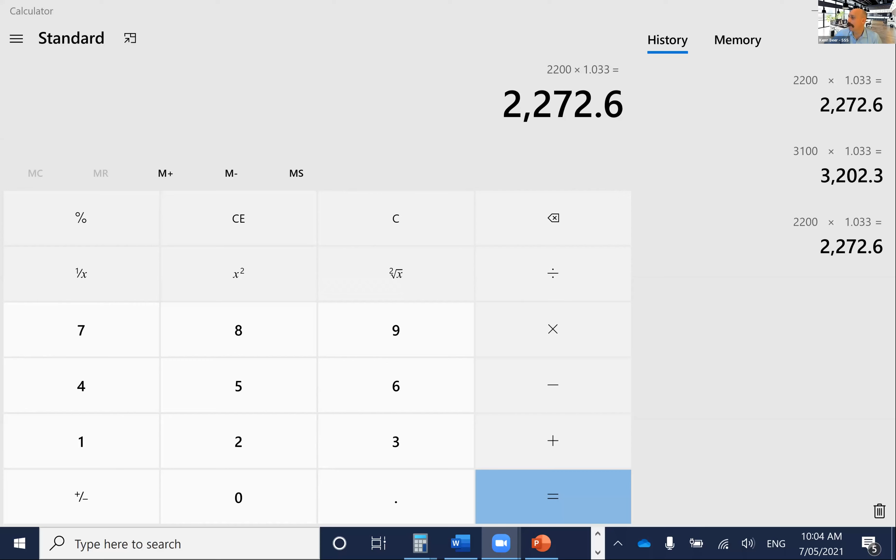The Arc de Triomphe roundabout. The French love a roundabout, and they're building like 500 a year, every year, in France. It's pretty impressive. I wonder how many we build in Australia every year. Yeah, interesting thing to find out.

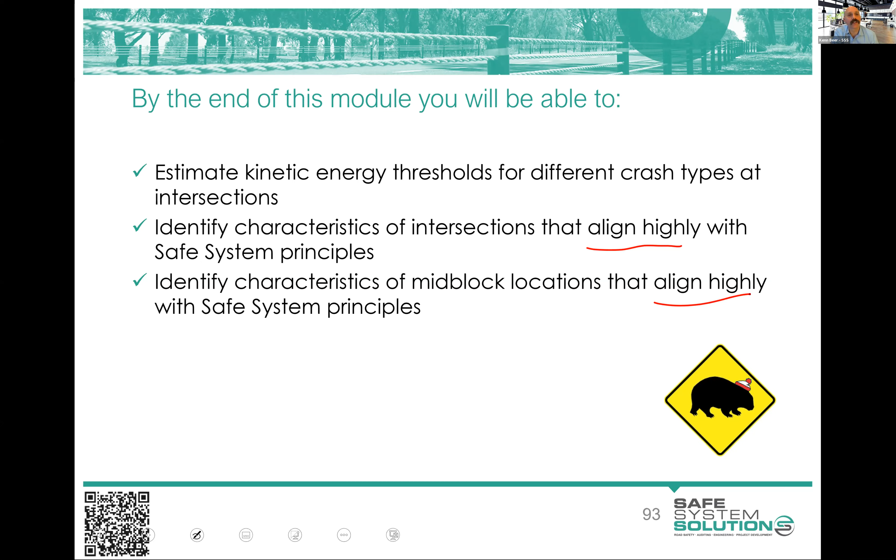Now, a little terminology here. You notice I talk about aligning highly with safe system principles. I think this is quite important. In the early days of safe system adoption, and it sort of continues today, people would often say, is your project safe system? Or, we can't do that, it's not safe system. That was kind of meaningless to a degree, because a safe system is a spectrum. We have things that align highly with safe system principles, or things that don't align so highly. So it's important that we all start to use that terminology rather than thinking safe system is binary.

Don't forget to count your wombats.

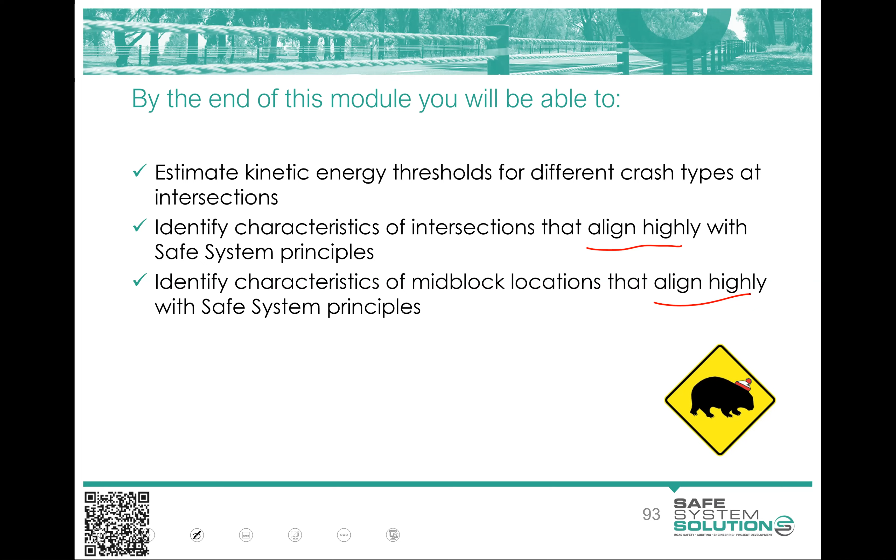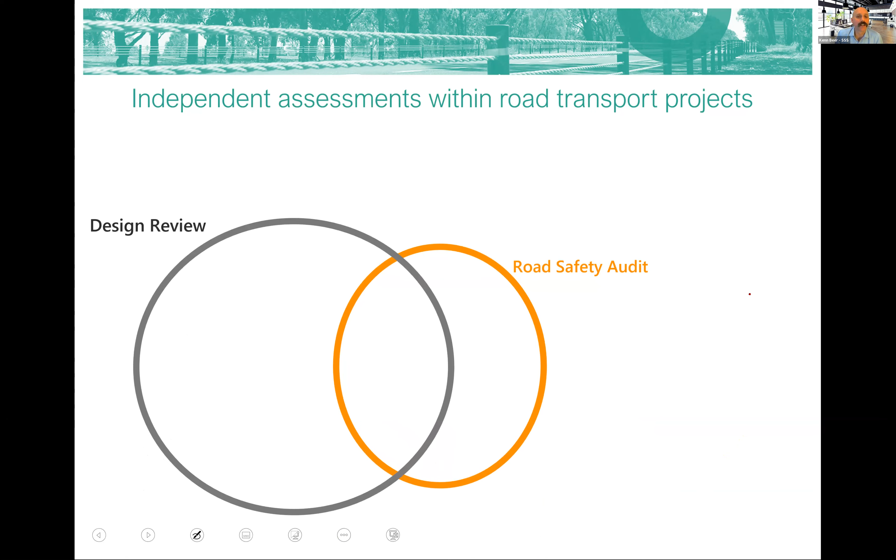We talked a bit last time about the context of road safety audits, design reviews, safe system assessments being this other entity, but with some overlap with safety in design and Disability Discrimination Act checks or audits or the like. So there are lots of processes to inject safety into your transport projects, and safe system assessments is one of them.

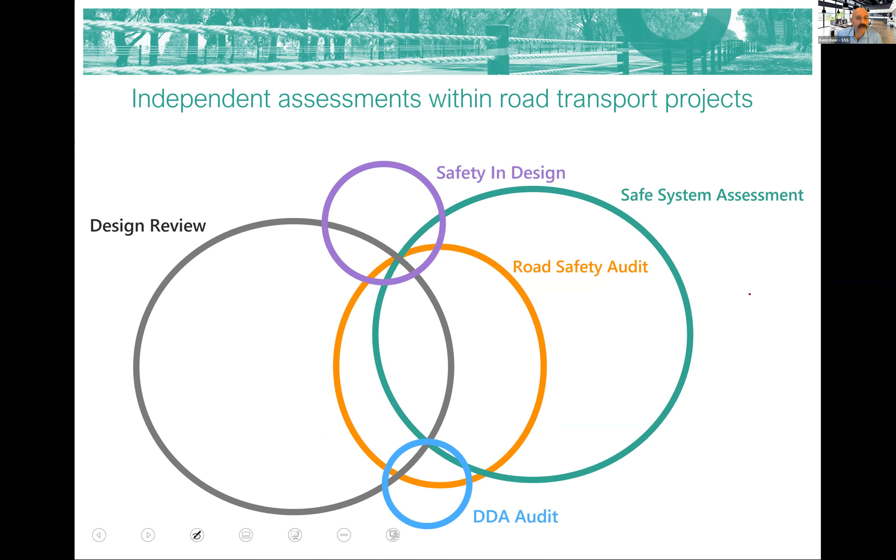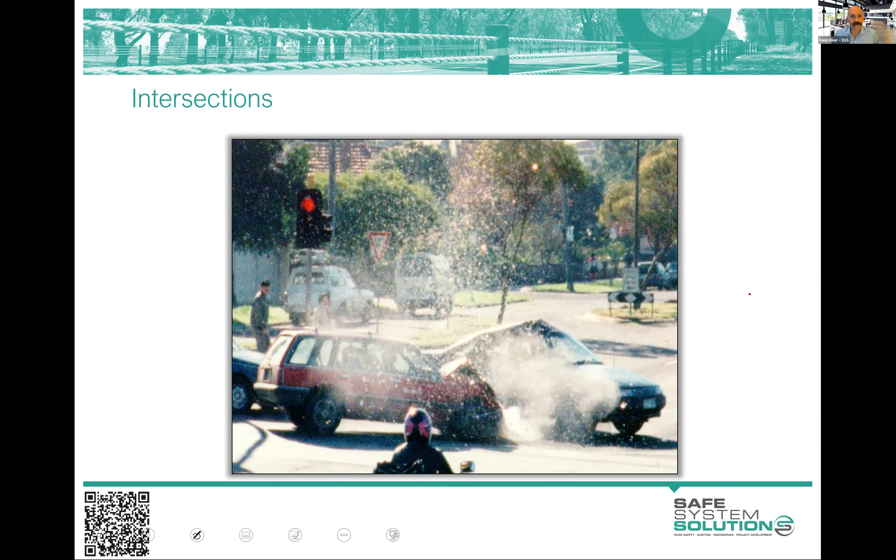Obviously, you need to think about all of this within the context of whatever your road user hierarchy is, your movement and place strategy, your strategic objectives of your network. We'll talk a fair bit about that next module. But for now, let's just keep it fairly simple.

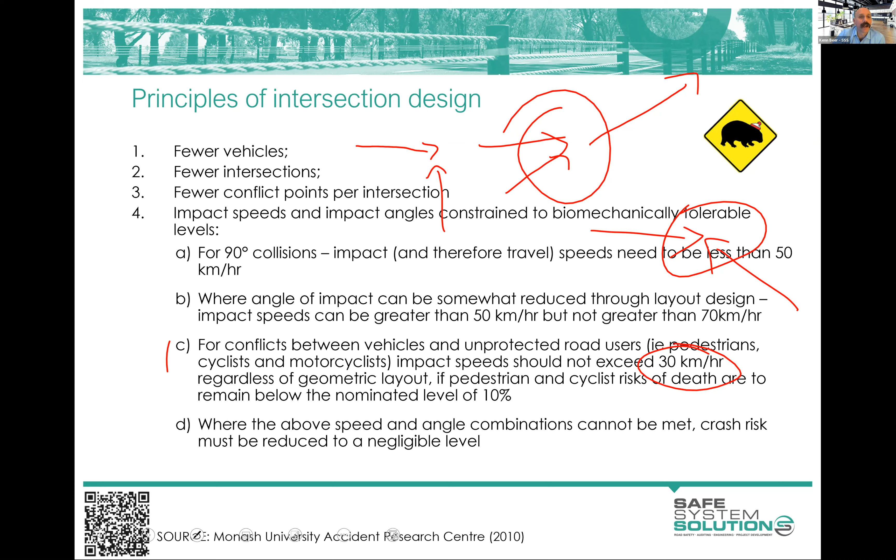And then for pedestrians, cyclists, motorcyclists, we're really aiming down around that 30 km/h or so. When we're not able to meet these speeds, we need to look for other ways to eliminate crash risk or eliminate the possibility of that crash, be that separating road user streams or other measures, which we can talk about later.

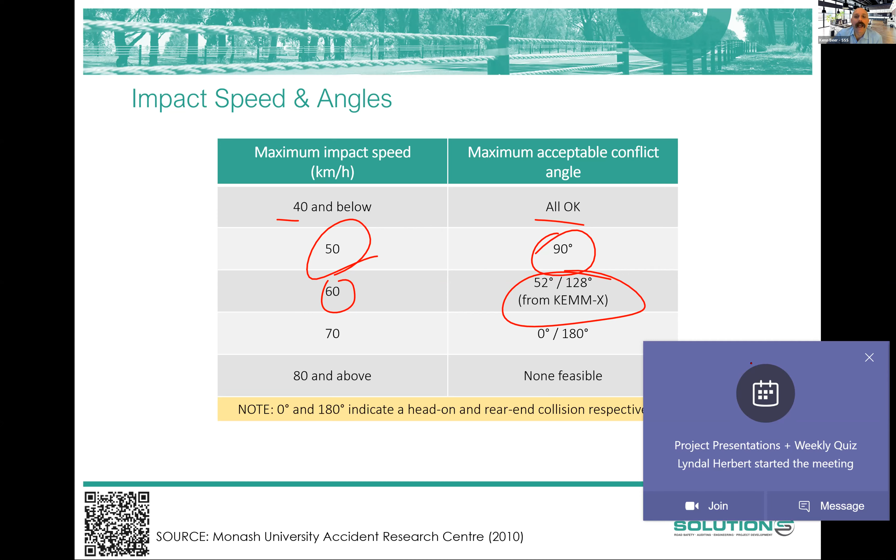At 70 it's head-on or rear end. And we're not really able to operate an intersection above 80 km/h if we're going from a standing start of vehicles. You can operate intersections well above 80 km/h - 100, 120, 140, 160, you name it - but you've got to really accelerate vehicles up to that speed as they enter. So your classic example is an on-ramp, isn't it?

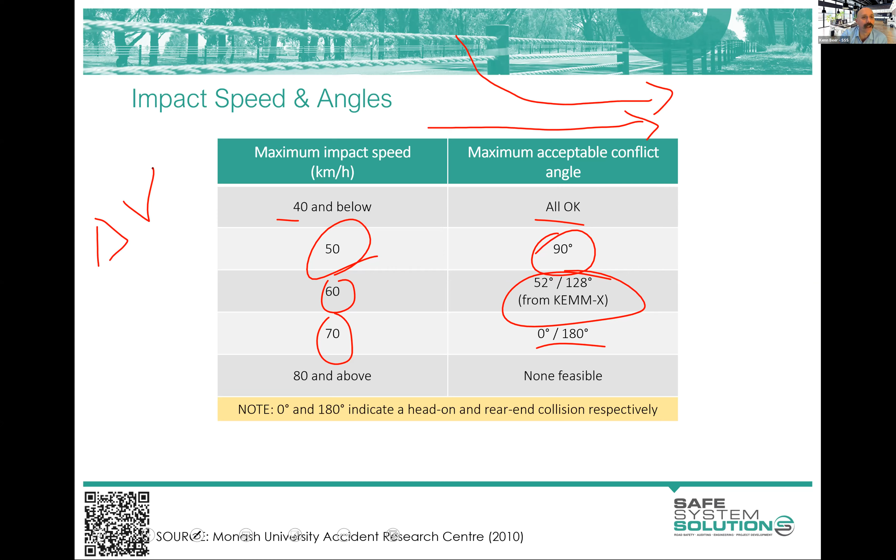You can operate them pretty safely because it's the delta V, the change in velocity, that we're interested in when the crash happens. So two cars crashing - one going at 180 km/h, the other hitting it at 200 km/h, going in pretty much the same direction - is generally okay in terms of energy transfer.

Yes, you've got to think about it that way.

Kathy, can you still hear me? Yeah, you're all good. Kathy, can you hear me? Yeah, you're dropping in and out there a little bit. Yeah, I just dropped out. Can you still hear me? Yeah, I can still hear you. You have frozen on the screen though. Yeah, just turn your camera off. Just a question that's popped through. Can you - oh no! Hey, there you go. You're a bobblehead.

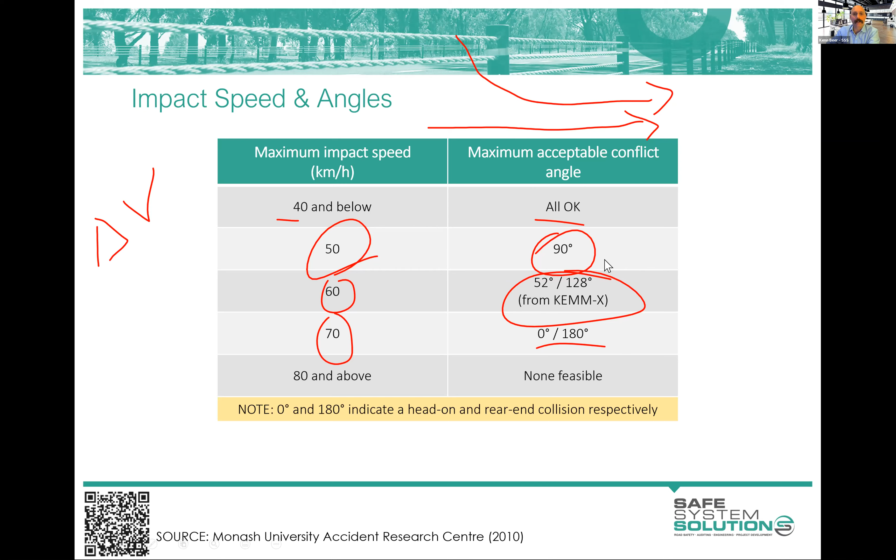Rear end speed, where heavy vehicles are the bullet vehicle - so rear end crashes where they're heavy - well, yeah, we have some pretty low speeds that are beyond tolerable levels when heavy vehicles come into play. There's actually a little bit of a lack of research in heavy vehicle energy transfer. Just doing the physics on it, you're in a bad way.

But most of the other numbers I'm giving you are based on crash - like mega studies of crashes. I've been able to get this from a whole lot of crash data, and nobody's really done that to a large degree for heavy vehicles. There's a guy in Adelaide sort of working on some of that, but we really know that heavy vehicles are going to cause a lot of damage in those rear end crashes.

It's still going to be better than a side impact crash. Certainly there's a lot of crumple area - there's the seat, there's the headrest, and all that are protecting the occupant of the vehicle. But nonetheless, it's a lower speed than the 70 we're talking about for car to car. Exactly what we peg it at, not quite sure.

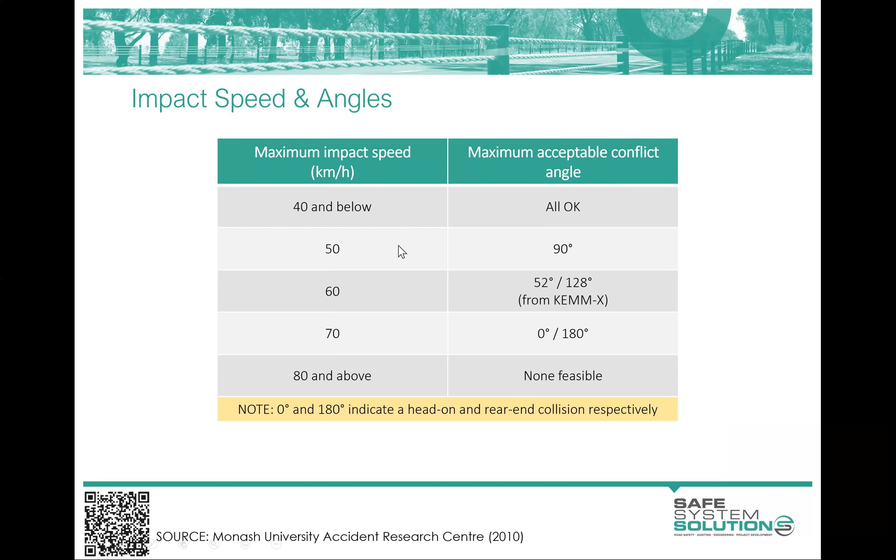Thank you, Kenn. Just another question that's come in: is this why we have a maximum speed for traffic signals at 70? Is that related to rear end crashes for the queue?

No, I'm not sure - that might be a specific Queensland requirement. I like it if it is. Actually, if you were pegging your maximum speed for traffic signals to safe system energies, you'd have it at 50, because there's potential side impact, right angle crashes at signalised intersections. But it's probably an indication that we know the performance - red light running and those sorts of things - and the energies are very bad for 100 and the like. So most jurisdictions tend to have some sort of limit on it, and maybe Queensland has 70, which is good.

You can sort of start to put angles on potential crashes. Here's a conflict point diagram with some angles on it. You don't need to be that precise in a safe system assessment - you can just go, that's pretty much a right angle crash, that one's pretty much a glancing blow. So you can peg them back to your angles and get some idea of whether it's above or below what we generally think is tolerable. I'd say that's pretty much a right angle crash there, although it's 104, it's pretty close to that. That one's pretty much a glancing crash, and you could be talking 60 kilometers an hour as the threshold speed on that one.

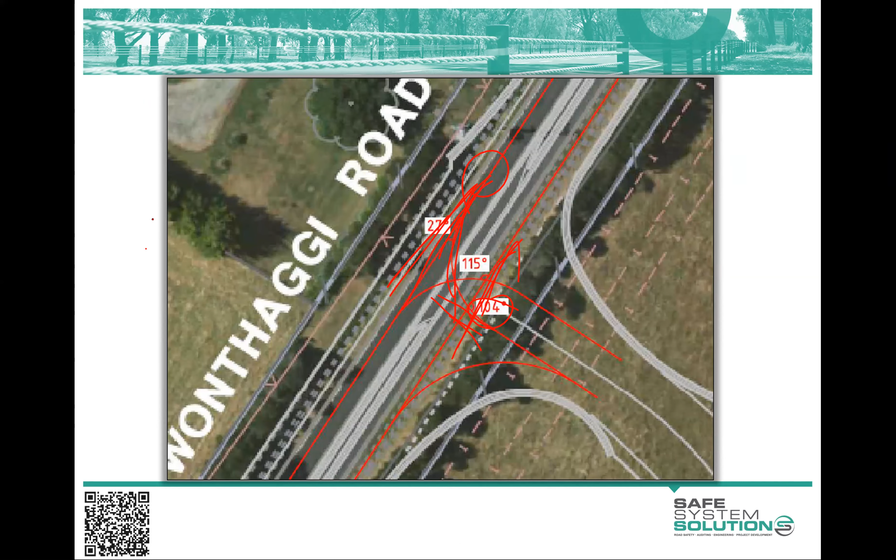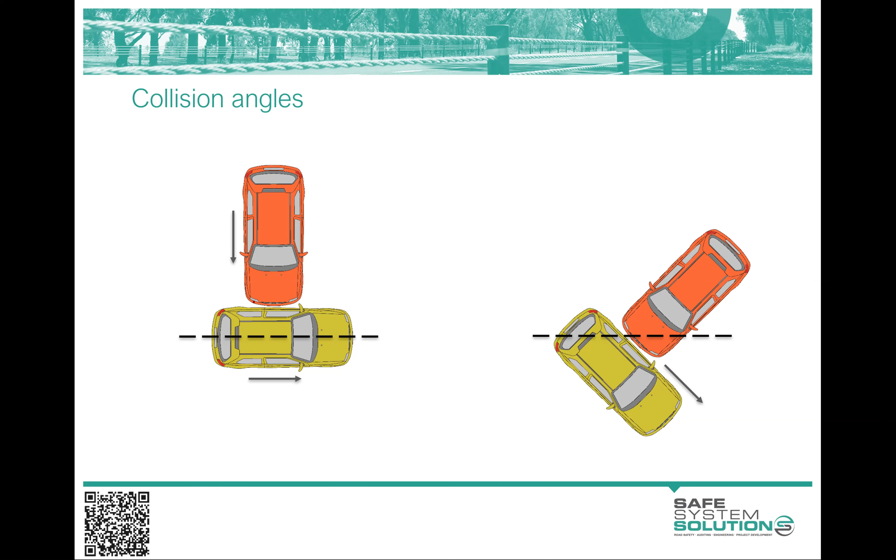The other thing I mentioned - you could have two cars crashing, one at 180, one at 200. That's right, but what you do need to think about is secondary crashes. They're really important. We know vehicles have their initial crash, and then they often have a secondary crash - vehicle to vehicle, and then single vehicles hitting fixed hazards. This especially occurs around intersections, because you've got the two vehicle interaction. And we tend to have a lot of fixed hazards around intersections - power poles, signal poles, signal pedestals, other roadside furniture and things. So we see a spike in runoff road crash risk around intersections in the lead up and through the intersection, because people are either crashing, clipping vehicles, avoiding vehicles, and leaving the road. So we do need to think about that.

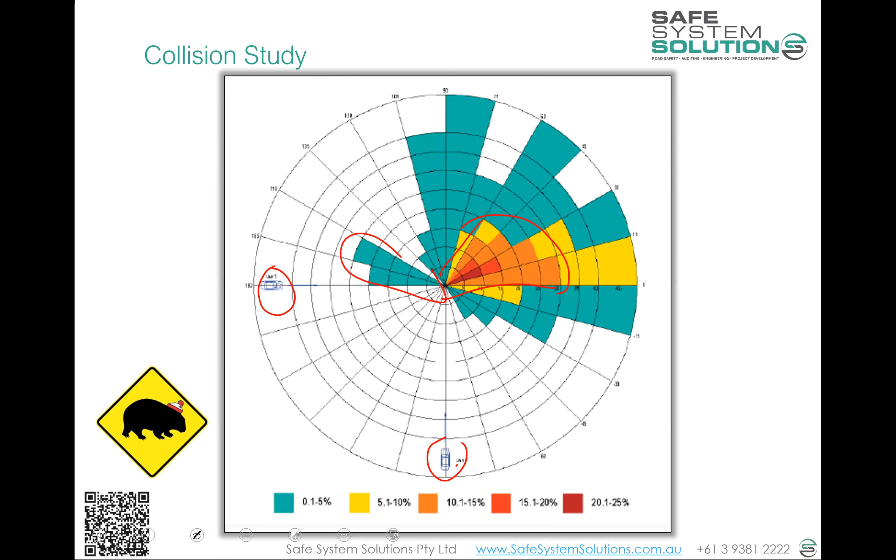Okay, let's get going with a little exercise. I want you to do something this morning.

I want to give you this intersection, right? And your aim for the little exercise is to redesign this intersection, and change anything else you want, to eliminate death and serious injury - eliminate it going forward.

I'm going to give you a few constraints, okay? I know you wanted complete freedom to do that, but I'm going to give you a few constraints. I'll explain the intersection and a few bits and pieces about it shortly, but the constraints you have are: one, you can't close this intersection. Because I know some of you are going, well, Ken just said the Monash University have put some principles down, and number one was fewer vehicles, and number two was fewer intersections - so can we just close the thing? Well, we've done the community consultation and analysed the network, and we can't close the intersection as part of our project parameters. In fact, access still has to be in and out in both directions. So that's constraint number one. Constraint number two is you've got a budget limitation of $3 million.

Anybody getting subtitles now? I accidentally hit something that's giving me subtitles.

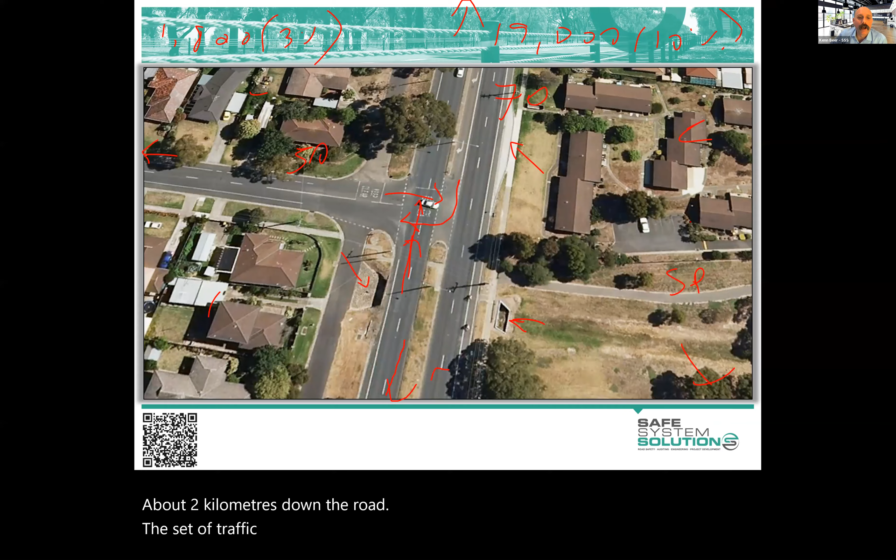There's a bit of info about your intersection. So you can't close the intersection. You've got $3 million to spend on whatever you want, and you've got to convince the community and your organisation that that's what they want to do, and we want no death or serious injury into the future, or as little as we possibly can get.

Questions? Instant cost estimator. How much for signals, please? Yeah, signals are going to cost you $1.5 million. It's fairly well set up for signals. There's a bit of civil works to do, obviously your conduits and the like, but 1.5 million for just bonking some signals in there.

Okay, and could you tell us where the school is again? Is that on the right-hand side? School is down the side road, about 500 metres down there.

What was the CV percentage on the main road? 10%. It's a B-double route.

Are we able to restrict some movements? Anybody living in this area has to be able to come up here and generally quite easily go either that way or that way. And likewise, people coming from down here generally in the area have to be able to get in, as do they have to be able to get in there.

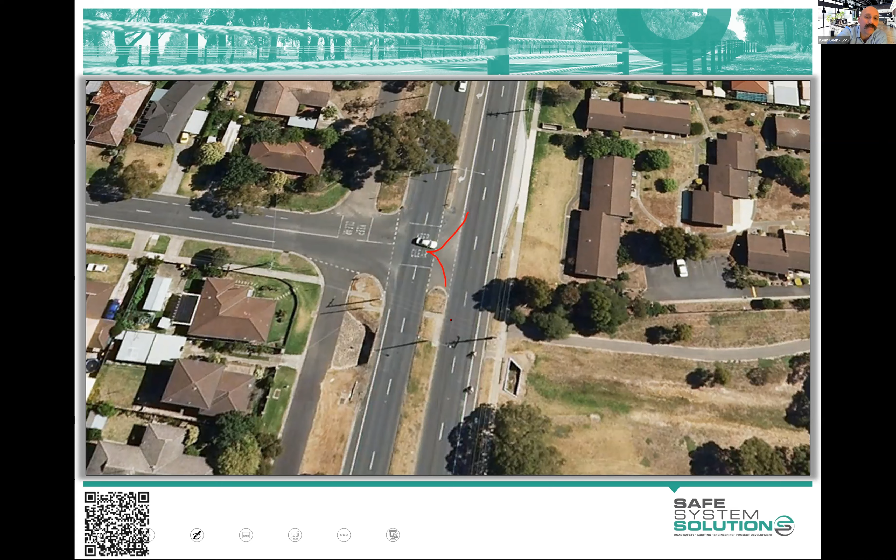We've had a seagull intersection proposed, which is really where you create - for those who don't know what a seagull is - you create a shape a bit like that. So they turn in, and then those coming out get an acceleration, and then merge in from the right.

Now, seagulls are an interesting one to analyse under a safe system assessment methodology, and the reason for that is you get a little bit of advantage in terms of crash angle down here, but you don't get any advantage in crash angle here.

The other thing is that the likelihood of crashes down here actually increases, because a merge from the right is a very problematic maneuver for a number of reasons. Certainly large vehicles with a cabin or whatever it is, there's no ability to look over your shoulder that side - you look straight into your cabin. Older people, or those who find it really hard to turn their head, struggle to merge. The right lane's often the faster lane. There's quite a bit of trouble.

There's a really interesting tool available - it's the seagull intersection risk tool - and you basically plug in your variables and it tells you your risk of a seagull at that intersection. Most of the time it doesn't perform too well. Interestingly, the person who proposed it here has opted to signalise it, which certainly helps. So that's a very interesting one.

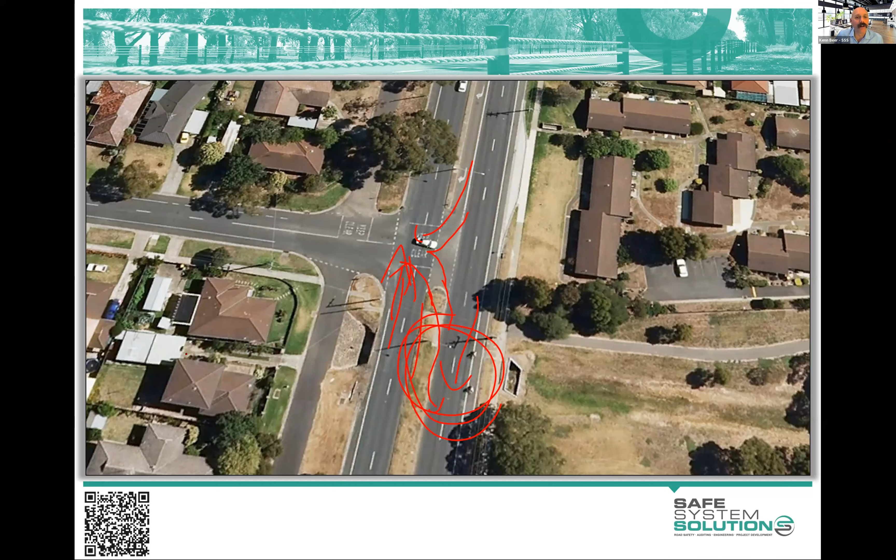Now, quite a number of you wanted to go with the signals, and as I say, very understandable considering the unbalanced flow, your cost constraints, the fact that the intersection is so well set up to be signalised, and the signals up the road and down the road, so you have consistency along the route. There's a lot that drew people to signals. You're all experienced people, and you could see that very clearly.

And rightly pointing out this will reduce the likelihood of crashes. But our aim was to eliminate crashes, wasn't it? The aim is - are our signals going to eliminate crashes?

What I did was put into one of our tools here, which is a heat mapping of fatal and serious injury crashes. I did it for outer metropolitan Melbourne, but it works for outer metro Brisbane, Cairns, you name it - anywhere there's a decent population. You heat map it, and it comes back something like this. The hotspots of death and serious injury - sure, you've already guessed it - these are signalised intersections.

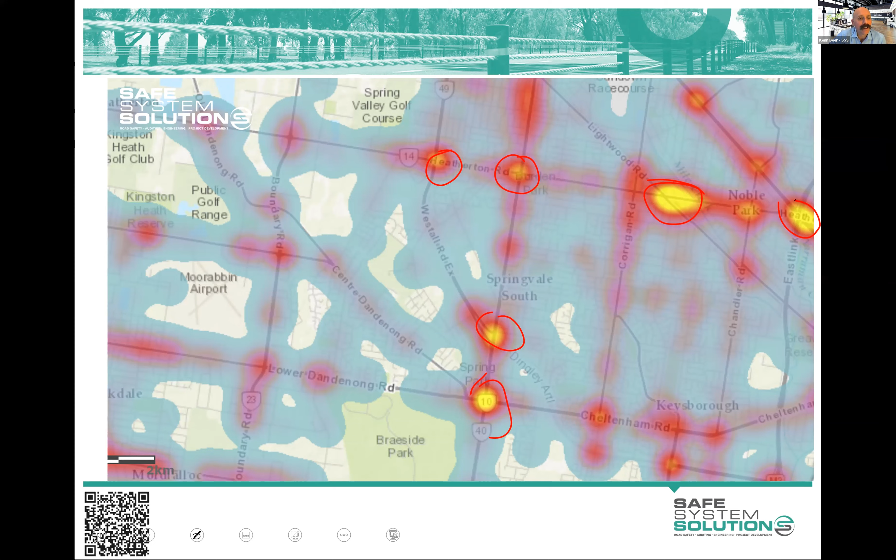Professor Jeremy Woolley, out of the Centre for Automotive Safety Research, when he was doing the inquiry into the National Road Safety Strategy, came out with a statement. He said traffic signals are the biggest failure of traffic engineers. That's a very provocative statement.

But the reason he said it was because there's a bit of a perception out there that when you signalise an intersection, it's your ultimate treatment until eventually, way down the track, you grade separate, you do a flyover - that somehow that's the end of the run there. But the fact is that it's a highly dangerous, high risk area.

Now, we are being fairly driven here by volumes as well. It's signalled often because of safety risk or these sort of things, but it's very driven by volume. So these are very high volume roads crossing - I'm not arguing with that, so there's lots of exposure. But what's going on that they consistently bring up this death and serious injury?

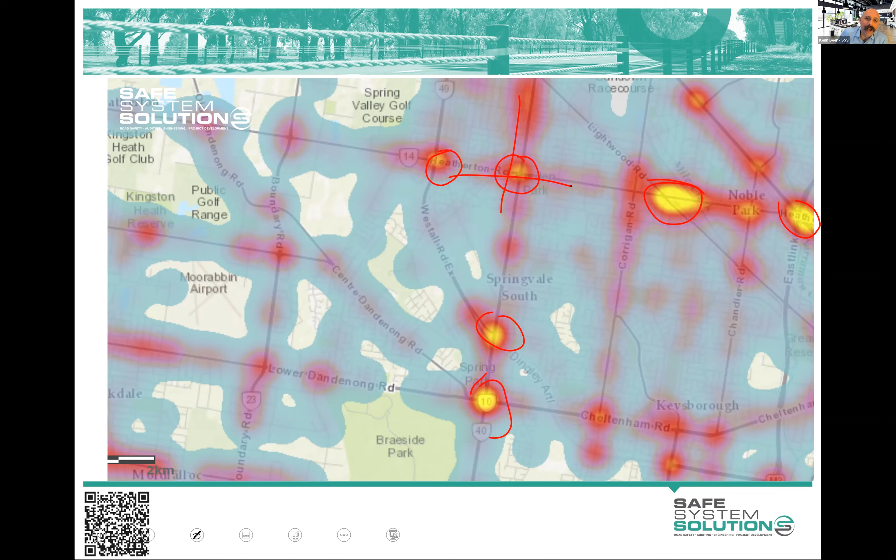But why - if these were all roundabouts - why wouldn't we see that? Well, people were trying to get a roundabout in there, and that's probably because you knew that they're going to perform better in safety, but you couldn't afford it, and we may have some traffic flow challenges.

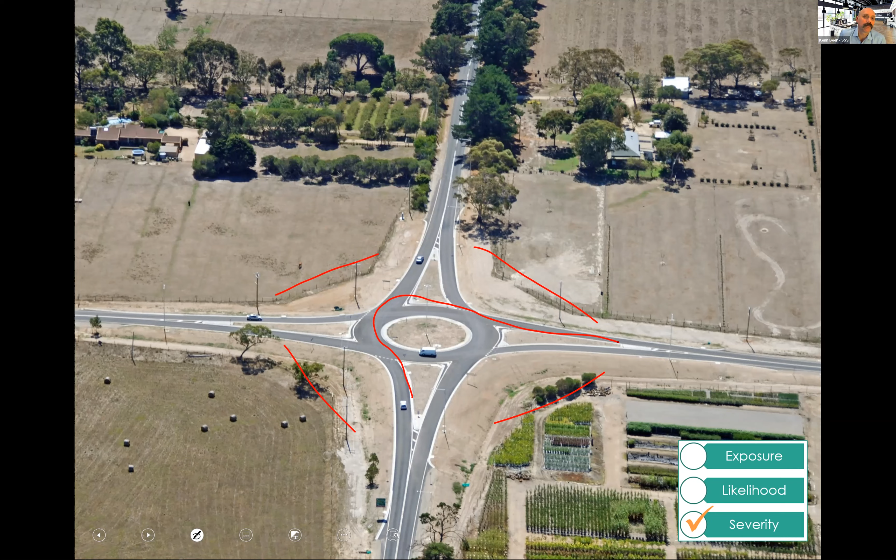We have little roundabouts like this one. Now, I'm sure you're all going, well, yeah, very different road environment, and you're spot on. But this is a mountable roundabout where, if you did have a large vehicle, they're just going to track straight over it. So you don't need to get them all the way around it.

But why would this perform better as a safety feature in a lot of scenarios? Well, the reason is that nobody approaching this intersection believes they have ultimate priority. So every driver approaching this believes there's a chance they will have to give way to somebody else. So they slow down and they look around, and there's a whole lot of good things about it.

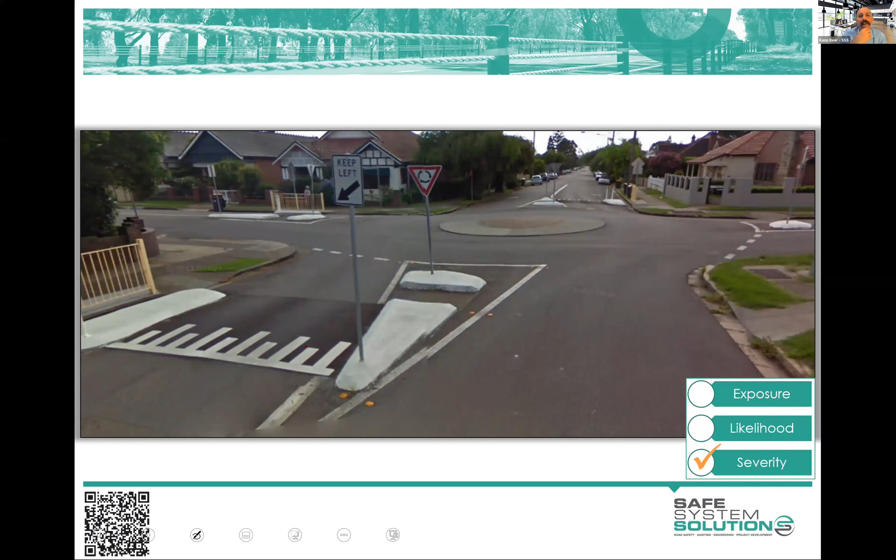Now, there's some challenges on this. You've got a pretty straight run through there. Vehicles can go at high speeds and those sorts of things. So it's not as good, but it's still pretty good. You can do things like slowing vehicles on the approach using raised platforms, but we're talking collector road environments here, really, aren't we? That we're looking at examples from.

But you're starting to see here that these ones are addressing the severity of crashes, whereas our signals were really only touching on that likelihood. And in order for us to genuinely take a real leap towards that elimination of death and serious injury in intersections, we need to hit on both the likelihood and the severity of crashes.

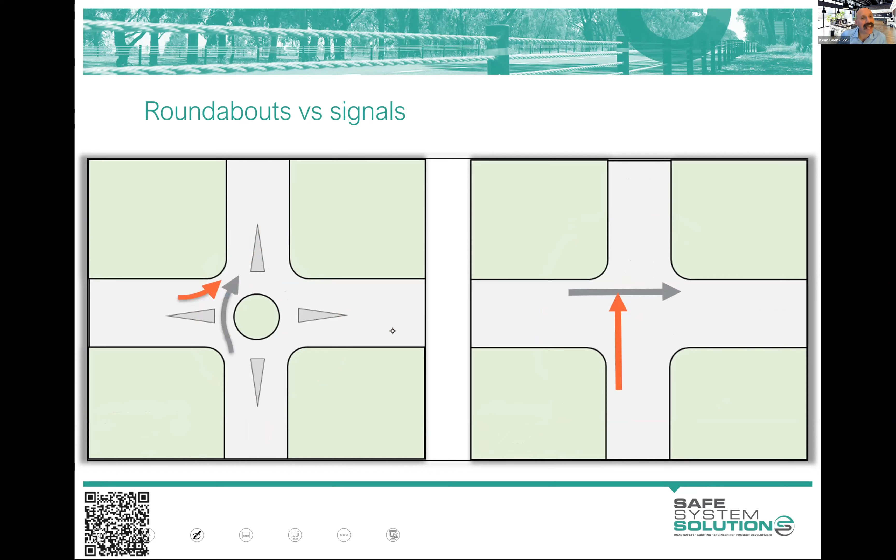The angles that you crash at are far better at a roundabout, okay? You're going to bounce off a bit, whereas that's a very harsh crash at a signalised intersection.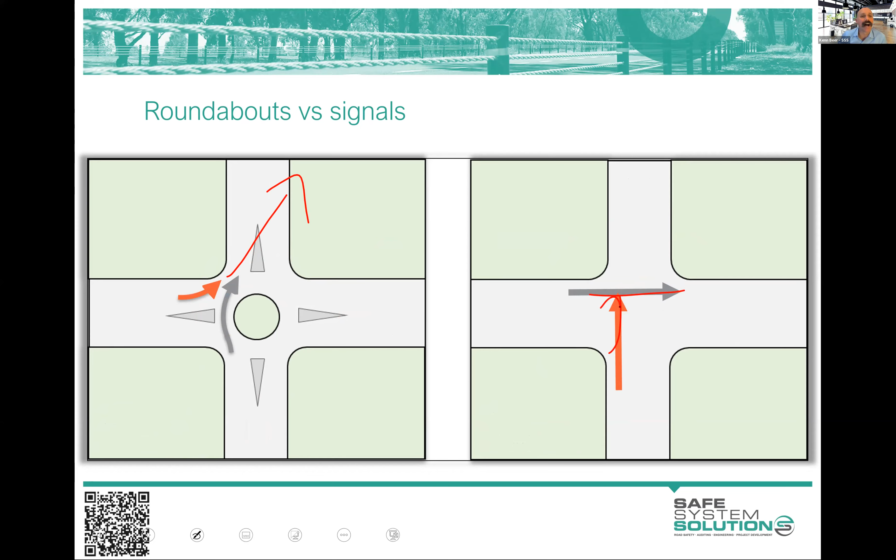And this one's just to show that when people are driving along, they drive in all sorts of states of consciousness. We would love them all to be alert, tuned in, very ready all the time. They're not, right? People drive half asleep. They drive thinking about the fight they've had with their partner. They drive after having a few drinks. They're working a double shift and having been at a wedding the night before. There's all sorts of stuff happening out there. We will continue to try to work on minimizing that, but it happens all the time.

And if you've got a set of traffic signals, some of these drivers do not wake up or come back to reality from wherever they are in their head, and they drive straight through the red light at whatever speed they're going. And I dare say some of you have probably done it. You probably go, oh my God, did I just run through a red light? Or you've driven, and you go, oh my God, I do not remember anything of the last 5 minutes of driving.

This is part of being human. If you put a big lump of infrastructure in the middle of the road, a roundabout, they wake up. They come back to reality. They look around. They slow down. They focus back in on the road environment. And so we've just got wonderful wins out of road safety by physically altering the infrastructure around that conflict point, that high risk spot.

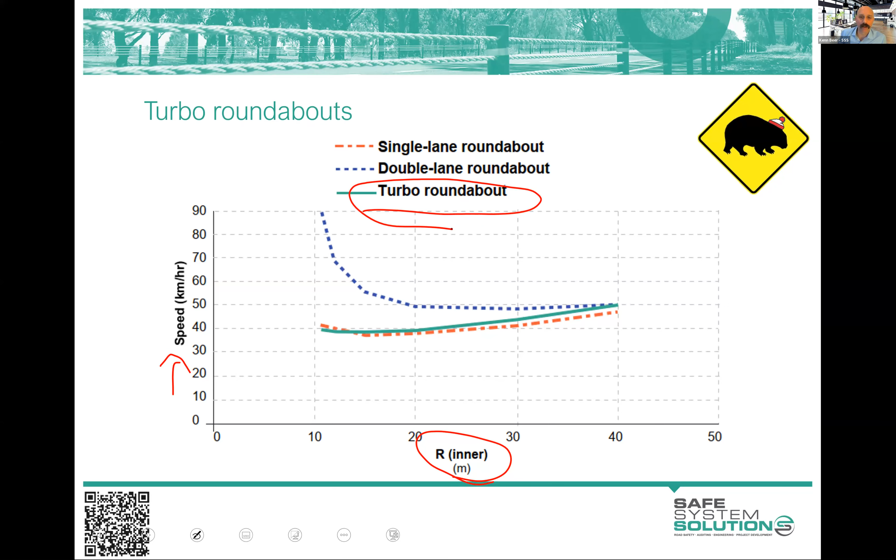Here's another turbo, for example. And I just love this, right? Look at the angle that this crash - probably not going to crash, but look at the angles that they're conflicting at. So it looks like the driver of the truck has gone out when they shouldn't. Human error, normal mistake. Car's coming around. The car's slowed down because of the roundabout. The geometry is just - they had to slow down. They're coming around and the angles are just much better. And so if that crash was to happen, we're very confident that everybody's walking away from that.

They'll exchange details, the panel beaters will get a little bit of work. But had this been a set of traffic signals and a mistake had been made and somebody had entered the red or a give way and entered, and then we had a right angle and we had speed of that white vehicle very high, we're talking death and serious injury.

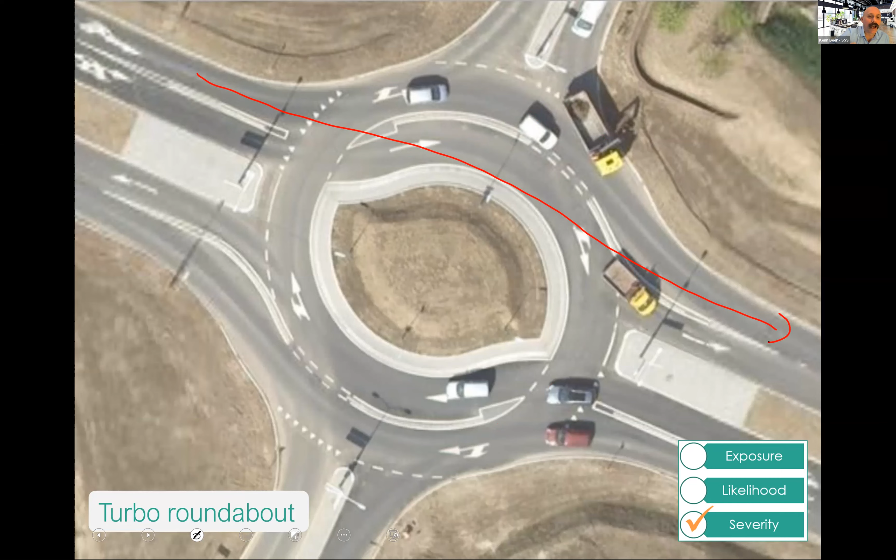They work really well. I mean, but there's only a couple of turbos in Australia. Most of them are over in Europe and the like. Admittedly, some of you road designers out there are probably going, good luck getting an A triple through that. And yeah, there's some practical challenges we've got there we've got to work through.

You can build some pretty big turbos though. So this is a big turbo roundabout in the Netherlands, and the reason I show it is this conversation that will stick with me for life that I had with a Dutch traffic engineer. I have not seen this one live, but we had this Dutch engineer come over to talk about cyclists and roundabouts, and we were doing some work with them on that and trying to work it out. And I popped this up and said, this is just amazing.

And he looked at it and he went, "This is the wrong way around," because I flipped the photo so we can actually understand it driving on the left. So they drive on the right, but I just flipped the photo. Anyway, but he goes, well known - I can't remember exactly where it is. And I said, yeah, so tell me a bit about it.

It's a signalized turbo roundabout. So it's got traffic signals here and here and here and here, and completely separated the bikes, as the Dutch of course would do. So, but I'm like, we talked a bit about volumes and we talked about speeds. And I said, in Australia...

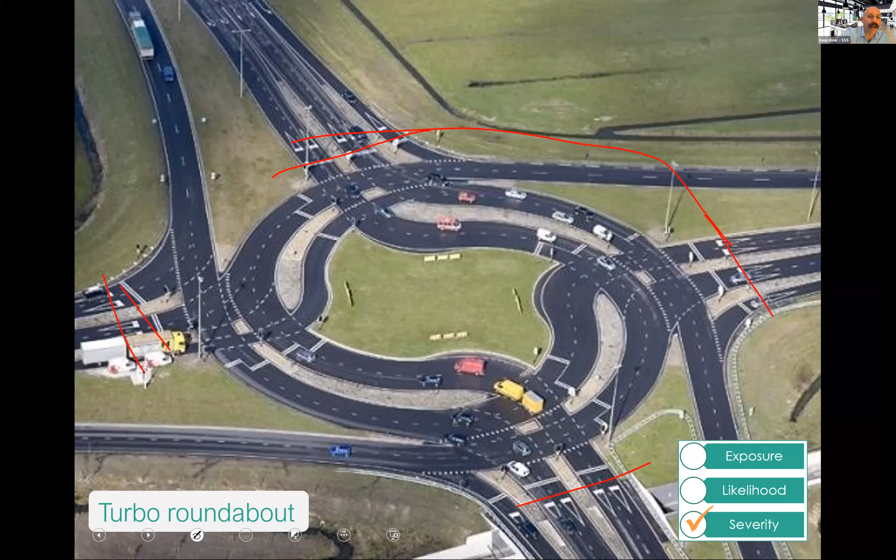But there are certain routes we've designated as traffic priority routes, where we're trying to move as much traffic through as fast as we possibly can. So how do you alter an intersection to get more traffic through while retaining some of these benefits of a roundabout?

People are coming up with these cut-through roundabout concepts and the like, which essentially give you almost as good performance, where you've still got the ability to do the right turn and store vehicles.

But any vehicle coming along has to slow down, improve their angle, and carry on through. So you still get some of those benefits.

And this one particularly, this is actually a concept. This has not been built.

I really like it for a reason - back when I was in the Vic Roads Road Safety Department, I was charged with reviewing all of the different projects under the congestion easing program.

That program was basically set up to rip roundabouts out and replace them with traffic signals, because they were saturated. They were clogging up the network, right? And they handed them over to me. Actually, I'm just going to see if I can find a memo that I used to use there.

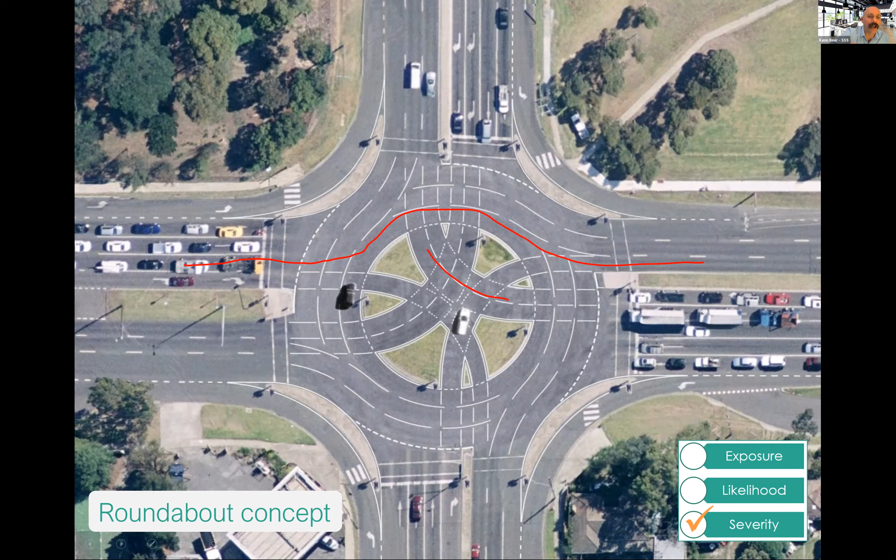Kathy, while I have a look for this, can you just tell me if there's any questions? It sure is.

Let's start with, do we have turbo roundabouts in Australia? Yeah, as I said, there's a couple of them. There's one in Horsham in Victoria. There's one in... I can't remember where the other one is. But yeah, few and far between.

Someone's saying, I came across a small-scale version of this Netherlands design in Melbourne near the airport, Broadmeadows Road and Melrose Drive. Curious to know how it performs. Do you know?

Broadmeadows Road - I think that was a signalised roundabout. I don't think it's quite a turbo. It might have a slip lane around it.

But yeah, signalising roundabouts is actually a really great thing to do. You can do it in a couple of ways. You don't need to fully signalise the whole thing - you can meter it by just signalising one leg.

You work out which leg's causing problems, and you put a set of traffic signals there. A little trick is to also make it a pedestrian crossing - that works quite well as well.

And then you have loops down the road that banks up, and when the vehicles store over the loop, it triggers the pedestrian signals, holds that leg, clears it out.

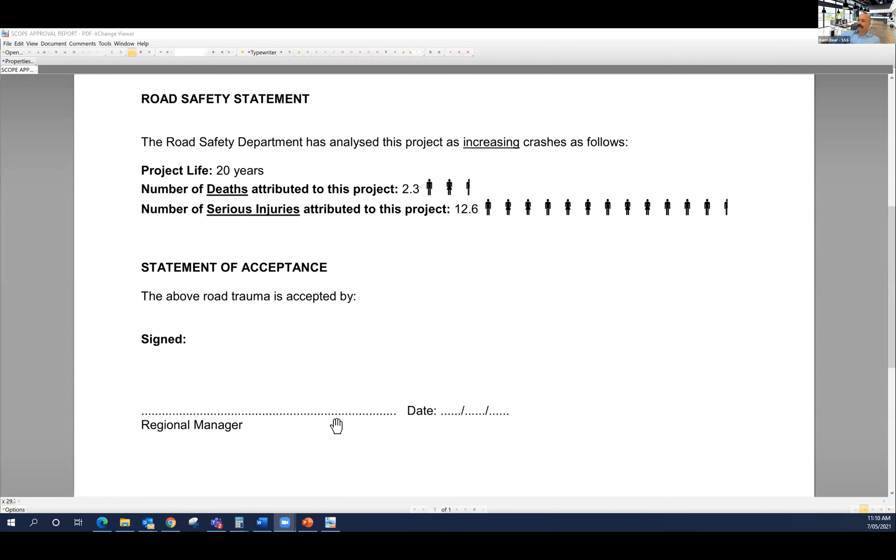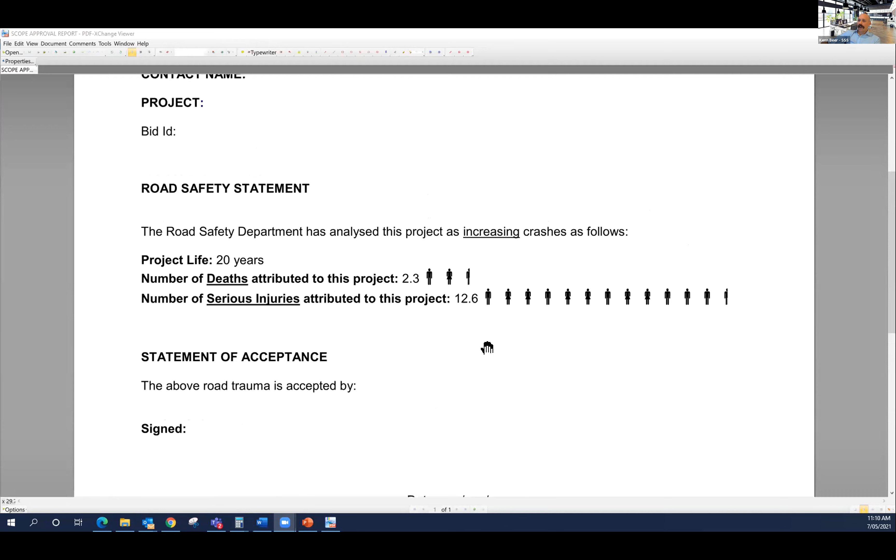Statement of acceptance: the above road trauma is accepted by, and then I'd put the regional manager or regional director or whoever it was. So I'd pop that on top of their project and send it back to them. I put little people there just to remind them that they were signing off on killing and seriously injuring that many people.

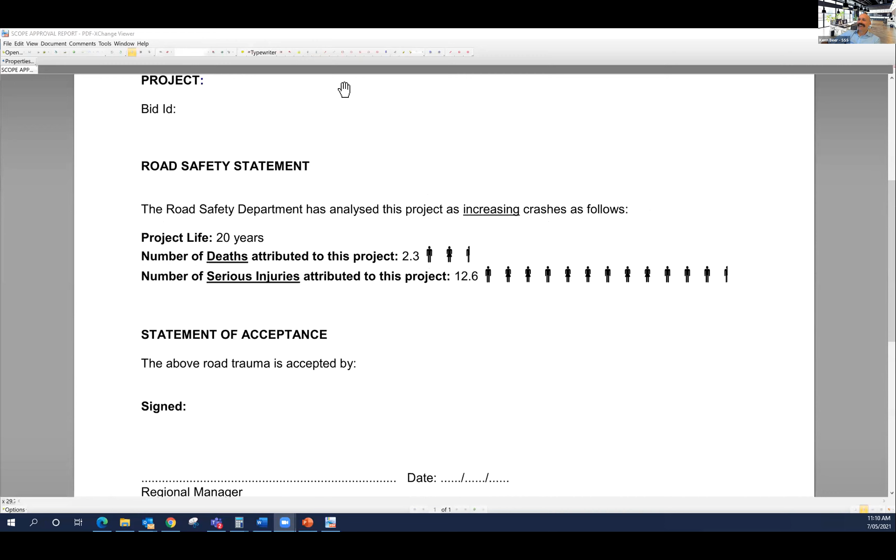Now, did I get any of these back? No, I did not. Did I get lots of complaints? Yes, I certainly did. And I got hauled into my executive director's office for a stern talking to.

About the obligations of a road authority to balance and manage, and these memos are oversimplifying the decisions that are being made, and that was the whole point of it. Let's not hide behind this. We know what we're going to do is going to increase death and serious injury. And somebody needs to stand up and sign that off. What it did is at least ruffled some feathers and got people talking about things and how we can do better and redesign things.

And I'll show you a little bit later on. We're in a better situation now in Victoria, at least, where you can't just rip out a roundabout and replace it with traffic signals because we know it's going to kill our community, and it's a choice.

It says you've got to boil it down to that: we're going to kill and seriously injure some community members to ease traffic congestion, and I said it was unacceptable. Eventually we're getting some more people on board to say it's unacceptable. I'll show you sort of some of the stuff that's been happening since.

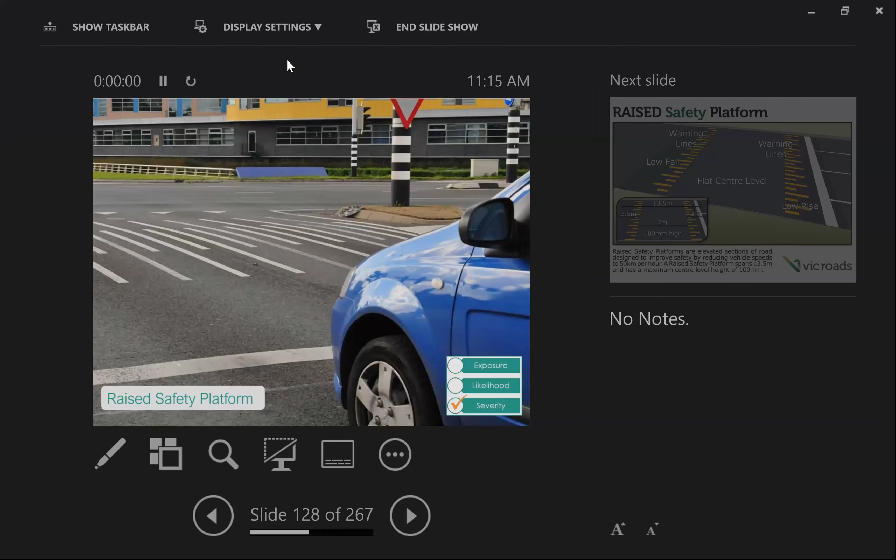Where can we find risk comparisons for the different treatment types? Risk comparisons for the different treatment types, as in crash reduction factor, performance of infrastructure - there's a variety of places to do that. We keep a pretty comprehensive list internally, so if you can't find good info on one, there's a few places I'd go.

Austroads did publish a report on crash reduction factors of treatments - they list a whole lot of treatments and crash reduction factors and the like. There's a place called the Crash Modification Clearinghouse, run by the University of North Carolina in the USA, but they collect worldwide research on safety performance of infrastructure and publish a crash reduction factor or crash modification factor, which is actually just the inverse. I also, as a nice easy one, go to the Road Safety Engineering Toolkit, which IRAP - the International Road Assessment Program - publishes, and they give some crash reduction factors as well. So 3 options there. Otherwise, shoot me an email and I will help you out.

Have you done any SSAs on diverging right turns, continuous flow intersections? Diverging diamonds, no - I take that back, we did a high level one for the New South Wales government. It shows better performance because you get more sideswipe type crash in terms of severity at some points. You still have some challenges, but it is a better safe system performing intersection than a standard intersection where you have that higher angle crash possibility. So yeah, I like them, I like diverging diamonds. And correct me if I'm wrong, there's a fairly new one in Brisbane - somebody might be able to tell me that, and I've got to go see it.

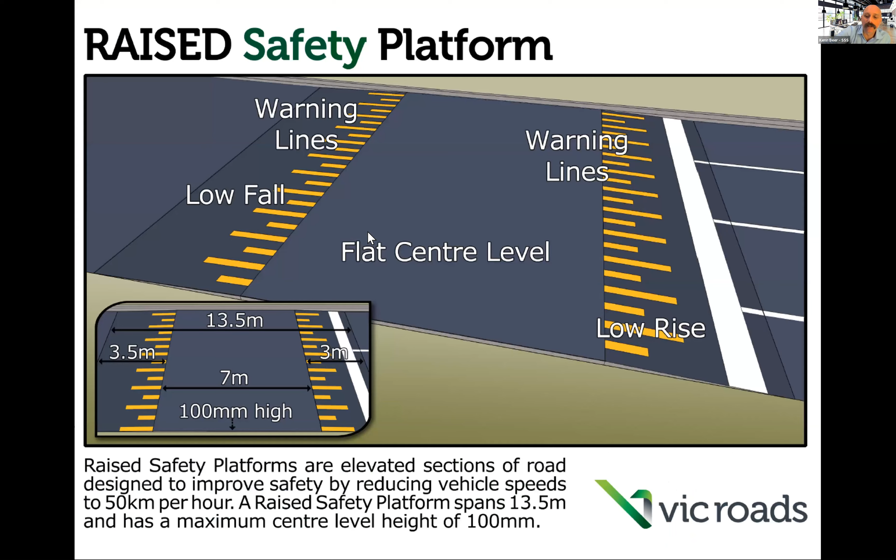Now they decided we only need to raise around the stop line, not the whole intersection, because these are the bullet vehicles. They're the ones that are going to be doing the damage. Maybe if this was a crossroad, different story, but these are T-intersections, so we don't actually need to raise the whole intersection. We just need to slow our bullet vehicles down. And they decided they want to slow the bullet vehicles down to 50 kilometers per hour.

Why would they pick 50 kilometers per hour? Anybody want to pop that into the chat? Why would they pick that random number?

All right, well, 50 kilometers per hour, if you remember all the way back to the first module, is actually the car to car right angle threshold speed. That's where we know it really exponentially kicks up. So what they're thinking about is the vehicle coming out and this vehicle striking it, or the vehicle turning in, and it's fairly close to a right angle. And they're trying to get it within that tolerable speed.

Now, if they were really wanting to make it within threshold speeds for pedestrians and cyclists, it'd be down to 30. But they sort of found themselves in this balance. They went, well, it is a really car-dominated area. The crashes have all been cars. Let's start with that. It'll help pedestrians out. It won't quite get us there. So they went with that 50. And it is a major arterial, so they're trying to keep speeds up as high as they can.

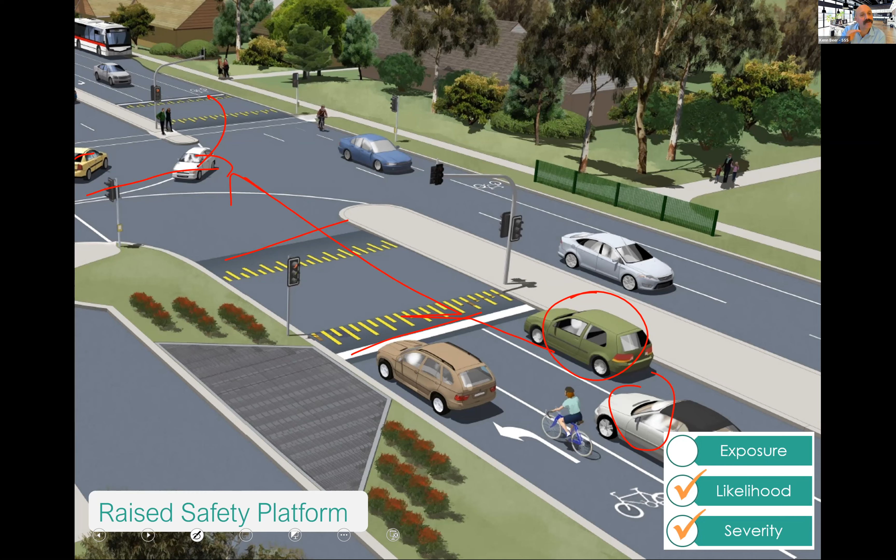But we've evolved a whole lot since then, and we understand that it's not necessarily designed like an urban speed hump. They're a more gradual grade, so you can do this sort of stuff, and it just brings people down a bit in speed. And that's exactly what they built.

Just wonderful. I mean, some people get really uncomfortable with that. They're like, oh, why are we slowing vehicles down for no reason? Like, we do it all the time with a roundabout. Everybody's happy to slow down and then go through that and speed up again. Why can't we do it through signalised intersections?

And then this one I love as well, because there's good research to show that the raised platform significantly pulls in your dilemma zone. So dilemma zone, for those who don't use the term or know the term, is the point in time or space where you are in a dilemma as to, do you put the foot down and go through the lights, or do you brake? So you've got the orange struck and you're right in that zone. That's the actual official traffic engineering term for it, the dilemma zone.

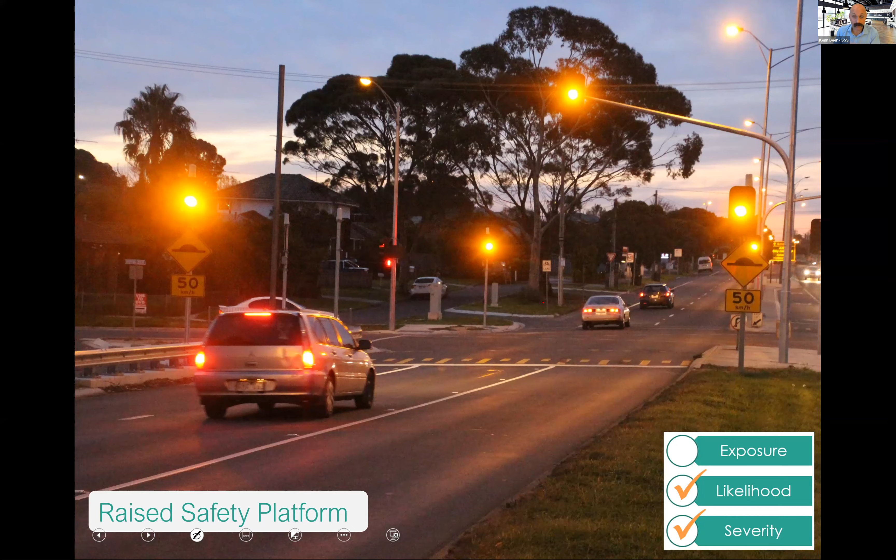So here's another one, and this one does really make me quite happy because it is a congestion easing program, which was rip a roundabout out, replace with traffic signals. And luckily we're now at a position where you don't do that without slowing vehicle speeds through that intersection. So you'll see there that this is 56,000 vehicles a day on Dalton Road, and Childs Road's probably about 25,000. Same thing, raised. It's raised, a bit hard to see from there, but you can see it's there, it's raised. Now this one, you can see there the raised pedestrian crossing there.

I would prefer that to have been a grade to get them down to 30 or 20, but they went with the same grade as that. But that, to me, is quite a nice setup for a slip lane. Just go with a bit harsher angle on your ramps if you can.

But this is important. We've reduced the likelihood through the traffic signals as our usual conventional run-of-the-mill approach, but we've hit up that severity as well. So I think this is sort of our next step forward. And Austroads has recognised that, and we have the Austroads work that has recently been released on raised intersections.

And I really encourage you to watch the 1-hour webinar on that and read the documentation. It alleviates a whole lot of fear about all of those things we've been talking about: noise, heavy vehicles, buses, motorbikes, traffic impacts. Some traffic engineers are just like, oh, you can't do it, it's going to stuff up the SCATS and the headway and all of this stuff. We can move the ramps around a bit. We can fit it in with the loops. So I really encourage you to start considering this.

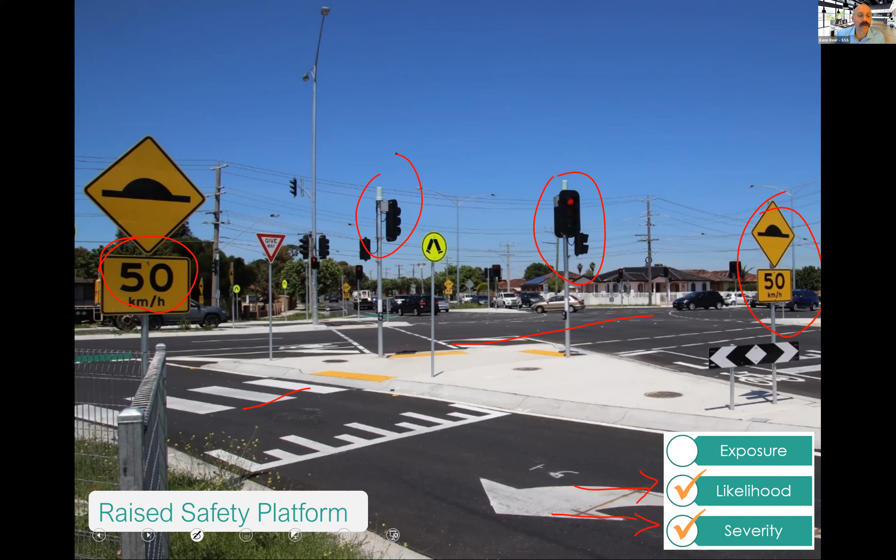So Kathy, can we pop the link to the Austroads webinar, which is a 1-hour webinar. So for those who are interested, you really should watch that. But it's not compulsory watching as part of this course. And maybe we could even put that document, it's freely available on the Austroads website. Yep, all good, I'll show everyone where it is at the end of the session today. Yeah, and there's some Victorian guidance on it, but all of that's been replicated in the Austroads documents. That's probably a better one, this is a little bit older.

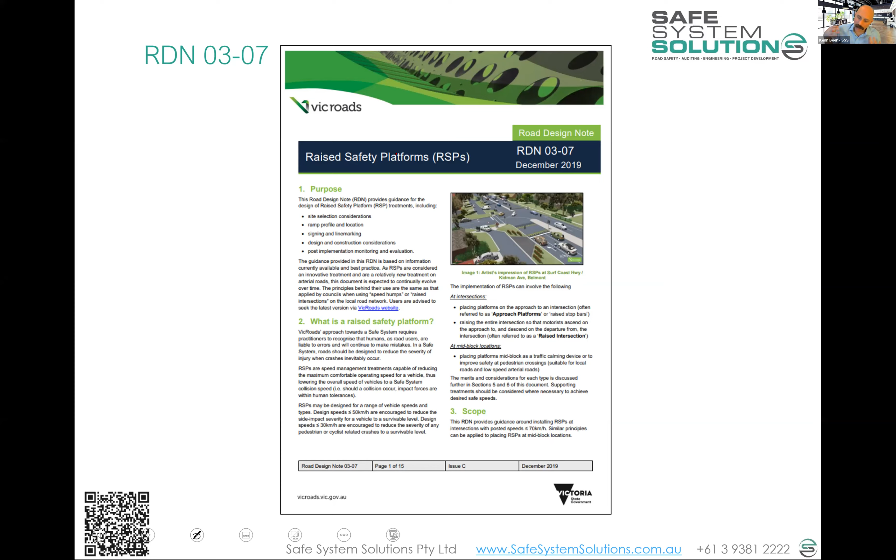So any other questions popped up there? I just wanted to, and I suppose the point is that I'm not saying that is the right or wrong answer anywhere. It's about thinking about exposure, likelihood, and severity, and not just going signals. We've addressed the likelihood, and then it's over to the drivers to do the best they can. If they run the red lights, it's on them. It's not on us. Well, reality is it's on us because we know they're going to, and we need to start trying to address that.

Thank you, Ken, and thanks for the comments and questions coming in. There was an earlier question about, do you suggest a safe system assessment need to be mandated in all intersection upgrades?

Well, I don't need to, I suppose, suggest it. Your government has said it's going to happen. So it's squarely written into your road safety policy for TMR. So yes, now it depends what you mean by upgrade, I suppose. And I think that'll play out in your actual application of your policy. Like, okay, if you're adding a splitter island on one leg, we know that's going to improve things, but you're not actually in the realms of investment enough to warrant sort of big changes.

But certainly if you are doing things like fundamentally altering an intersection, roundabout to signals, or even signalizing give way, or doing big diverging diamonds, or all these sorts of things, absolutely, a safe system assessment should be done, as should supplementary road safety audits along the way. So we've got to keep pushing and injecting that safety influence into it.

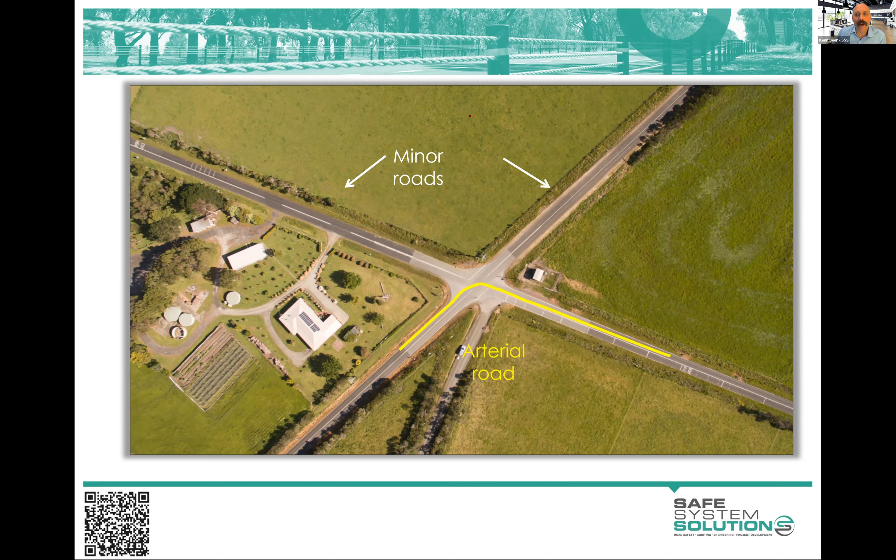Just another little example, again with this philosophy that we're not going to accept just the likelihood if the severity is above what we can tolerate. This is an interesting example: we've got minor roads, an arterial road going around, and a telecommunication exchange building that would have cost about $2 million to move—it was insane. So the region said we've got lots of safety concerns at this intersection, it's high speed, 100 km/h in each direction, and we've got crashes and bad stuff going on.

They said, let's do a roundabout. Then they realized we can't afford a roundabout because we'd have to move the building, acquire land, and it's got to be big enough to get large vehicles around. So then they considered just doing right turn lanes and more active advanced warning signs, but that still leaves the high speed problem—when things go wrong, it's going to be really bad. Fewer things will go wrong, but it's still going to go wrong.

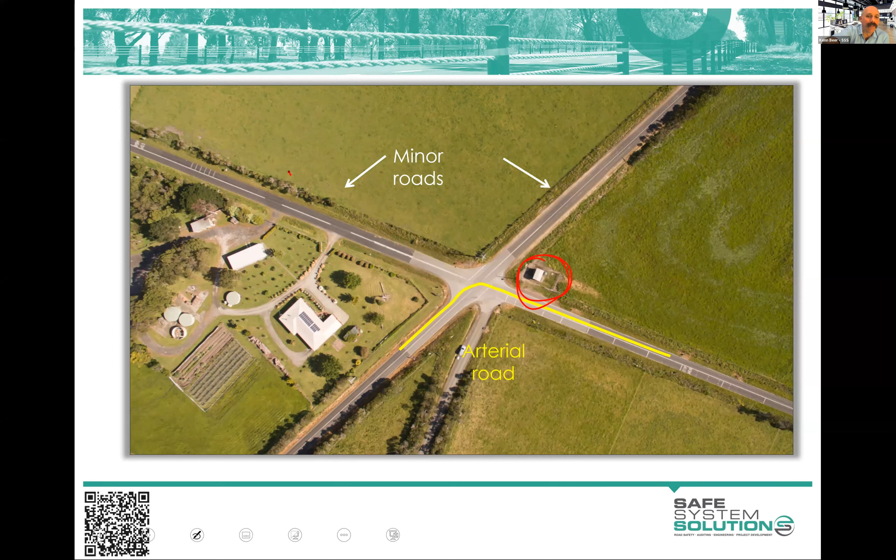So they started investigating what could be done, and this is where they came up with the idea of a compact roundabout. It's not big enough to meet Austroads' guidance, but what they've done is make it straight on the approach, so there's no horizontal deflection to slow vehicles down. Instead, they've used raised platforms again, raised the whole intersection, and created a very little roundabout with a large concrete apron around it so tracking vehicles can get around it.

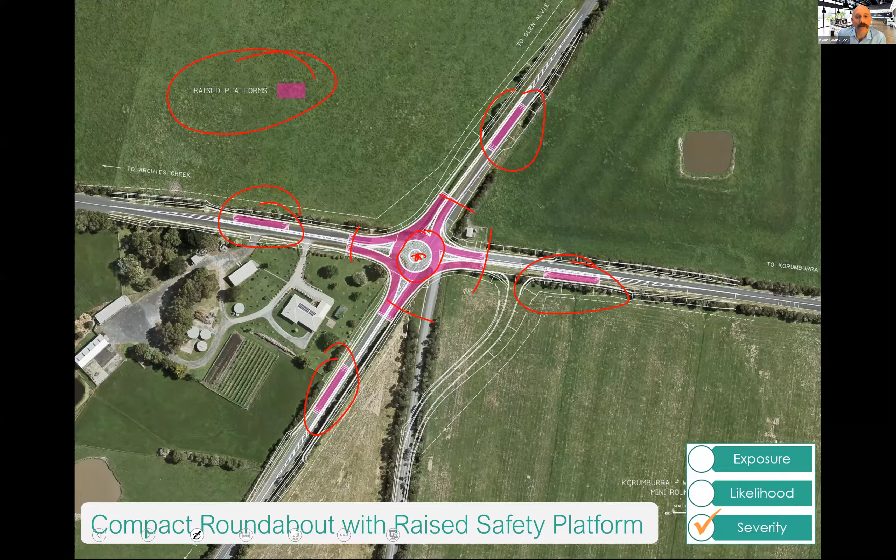There were a good lot of design committee discussions on this—oh, was there ever. Anyway, it was finally built, and here's an aerial image of it. You can see the raised platform on the approach to slow vehicles down, and a second one to slow vehicles down further. You can see the little roundabout and then the big concrete apron, so a large vehicle will track significantly over that concrete apron.

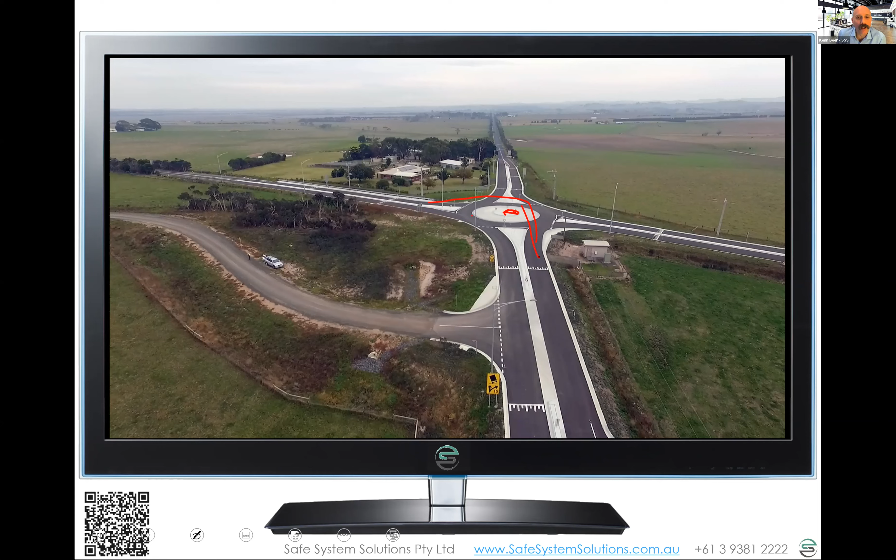That's the $2 million exchange building right there. They managed to come in at about half the price of a conventional sized roundabout, so it's a good little case study. Again, it shows that determination not to just accept that we can reduce the likelihood of crashes by 20 or 30% and that's the best we can do—pushing hard to address the severity of crashes as well.

Ken asked, how do you turn right into the old fifth leg? Oh, this one—yeah, that's a great question. I actually think that is a mountable island; you can see the end of the island there, and the end of the island there. So it looks like it continues through, but it's just concrete—you go over it, then go right in and out. I can send you the detailed designs of this if you've got a particular interest.

All right, let's do a little quiz, just to keep us going. Remember, you're not getting marked on this—there's one at the end of the session you'll be marked on. True or false: traffic signals are not a safe system. True, false, or unintelligible question, meaning like, that doesn't make any sense.

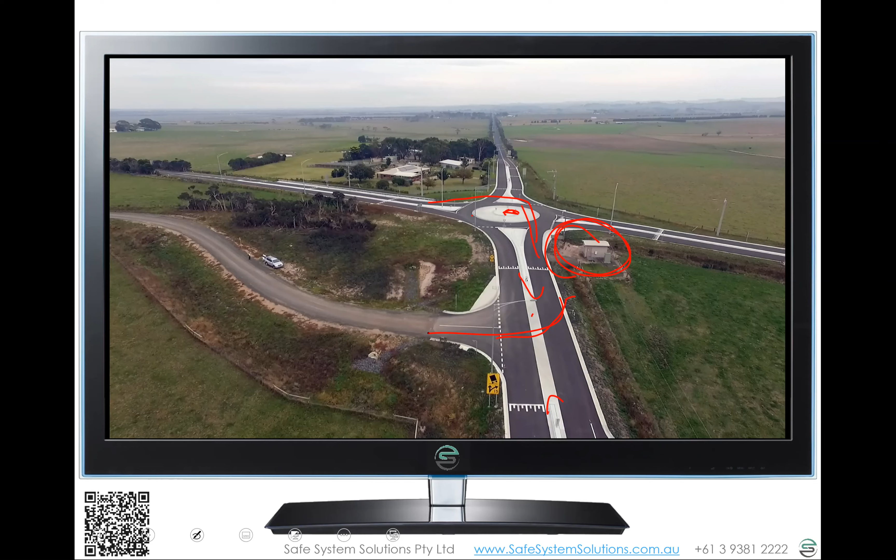Do any states in Australia run regular annual roadworthiness inspections, including safety, like Europe? Usually this starts after a vehicle's about 2 or 3 years old. Are you aware of anything there?

I don't think so. I think New Zealand runs an emissions one, and New South Wales maybe an emissions one too, to check you're not polluting the environment, but I don't think there's a specific roadworthy check in any jurisdiction that I'm aware of. I know that the Transport Accident Commission did a study into the benefit cost of this, and it was deemed not a good investment. But maybe we've sort of evolved from that.

There's actually some interesting stuff around vehicle buyback schemes, so buying the 1 or 0 star vehicles off the network, and you can improve road safety that way. That one has a bit more economic viability to it.

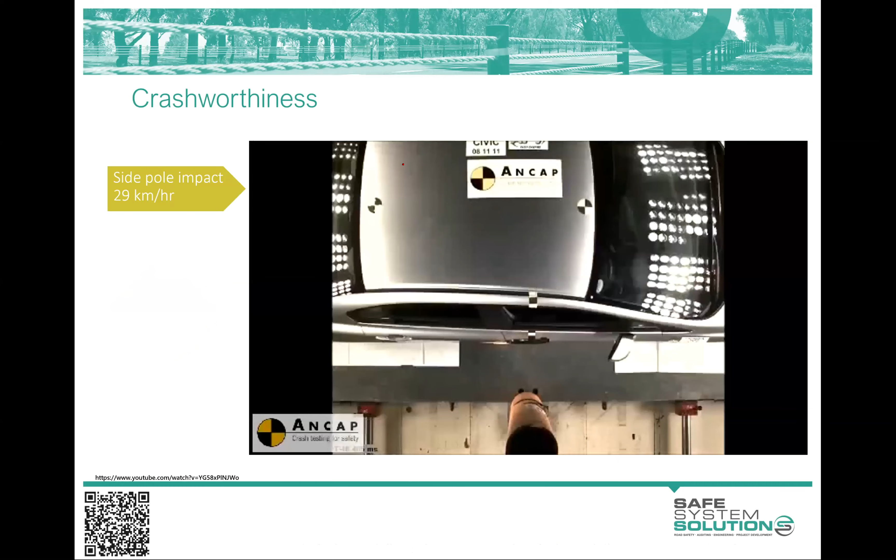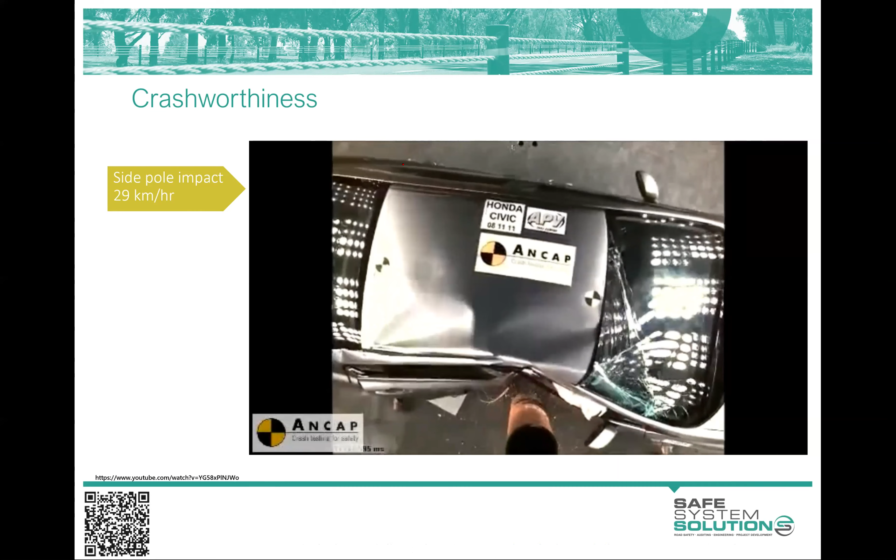We talked about it last module, that vehicles hitting a point source hazard, like a power pole, a tree, or even a culvert, experience an abrupt stop. This is the crash test at 29 kilometers an hour, which has gone up to 32 kilometers per hour. That's what's sort of happening.

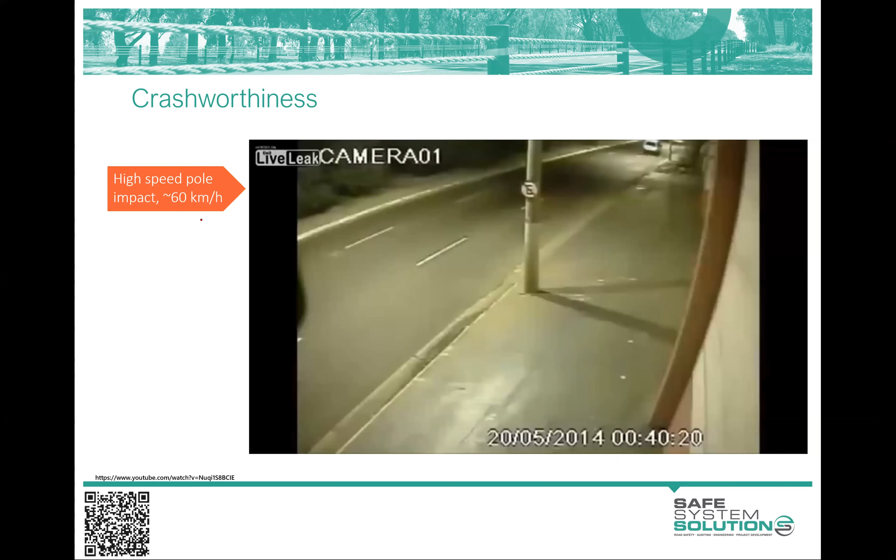But take this one, which is at 60 kilometers per hour - this is a prediction at 60 kilometers an hour based on a bit of looking at the video, but about somewhere around maybe 60 kilometers per hour on this one. Sorry, bear with me, I have to get it to play. Here we go.

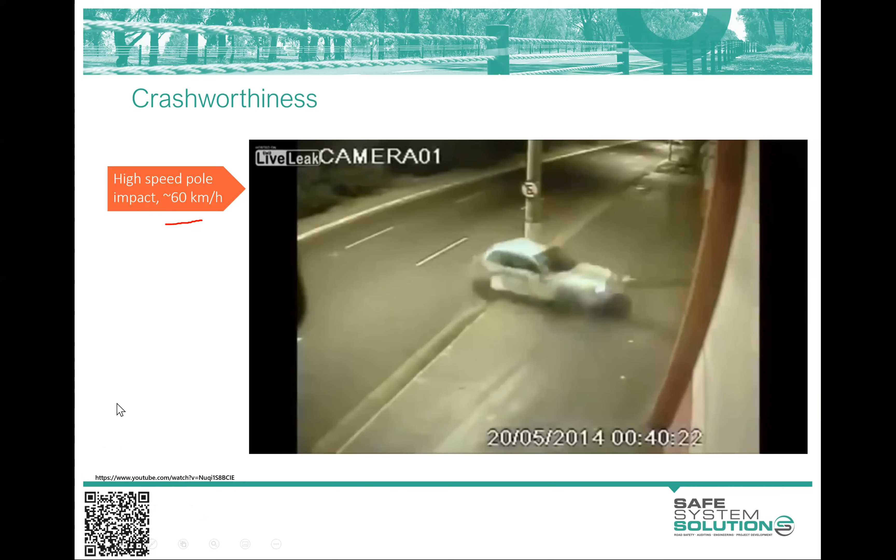The violence and the energy in that is immense, right? And that's just 60.

So the idea that we have vehicles traveling along the roadside at 100, and maybe they'll wash off a little bit of speed as they yaw and slide through the roadside, but hitting trees and power poles - really anything above about 30 or 40 kilometers per hour is highly likely to result in death or serious injury to occupants. So the energies are immense. The reason for this is it's that point source, and all the energy is transferred, often into the side of the vehicle.

So we often come up with this idea that we've just got to create these clear zones, right? That's been a term that's been around forever - well, not forever, since the 1960s. The idea is let's clear the road out free of fixed hazards so people have areas to recover. We came up with clear zone graphs that basically ask: is this hazard within the clear zone or not? If it's in the clear zone, we either have to get rid of it or put a barrier up. If it's outside the clear zone, it's fine.

Well, again, we're looking at these now through fresh eyes and reassessing our approach to this. This is a good diagram showing run-off road casualty crashes per 100 million VKTs.

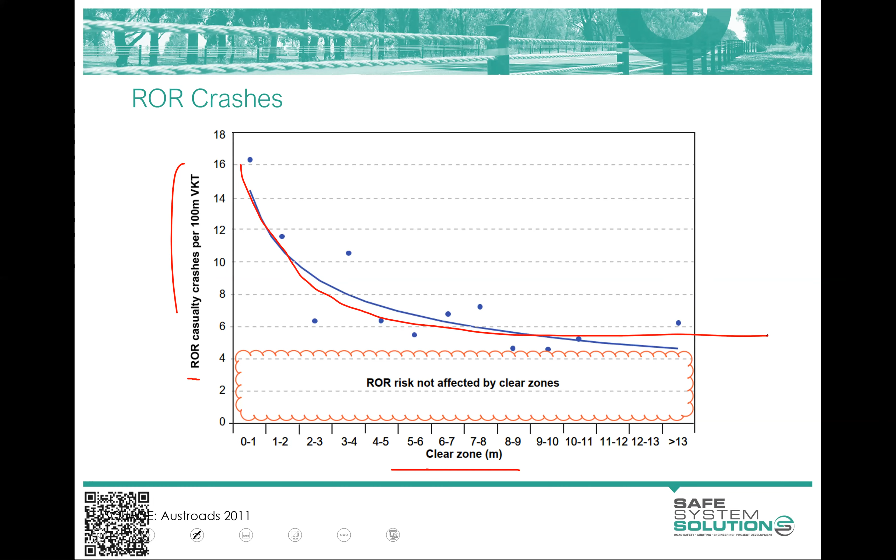Anyway, so we see as cleared area increases, the casualty crash rate comes skyrocketing down, but then asymptotes out - we don't go below this 4 casualty crashes. The reason for that is we have vehicles that go way, way beyond any clear zone and hit hazards, but we also have rollover crashes within these cleared areas, and they're significant. So clear zones, wide areas free of hazards, are not necessarily a safe place to be because of those going beyond it and the rollover crashes.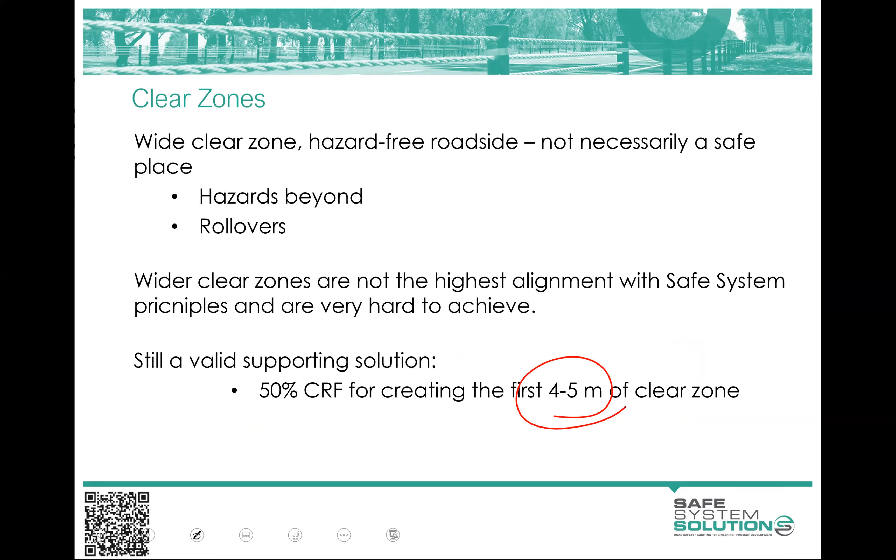We know that the biggest bang for your buck is around the first 4 or 5 meters of cleared area. So when we're designing new roads, this is not how we would design them anymore. I mean, a year or two years ago, this is exactly how Austroads Guide to Road Design Part 6 would tell you to design it.

This bit of road was built only about 10 or 12 years ago or something like that - a big bypass, with a big wide median, clear zone, hazards there. Maybe they could have gotten rid of these trees. Dual lanes, shoulders.

These are truck rumble strips, by the way, because the audio tactile isn't as effective on trucks. Just did a snippet on that, actually.

But the thing is that this road has a heap of death and serious injury on it from people falling asleep, going past the clear zone, hitting the trees, getting all the way to the other carriageway, head-on crashes. It's a fairly new bit of road. And it's really tragic to see this. I mean, we had the Pacific Highway upgrade, duplication, spent billions of dollars.

They're duplicating it pretty much exactly looking like this without these. And one of the sections, the minister opened it, and it was within about 6 weeks that a car went all the way across the median and hit a car with a family of 4. They were all killed, and the driver of the one vehicle and the other.

And you're sort of like, how can that happen with a brand new bit of road with all of that money spent on it? And it's because there's sort of this, trying to expect that we're going to have humans performing pretty much right all the time.

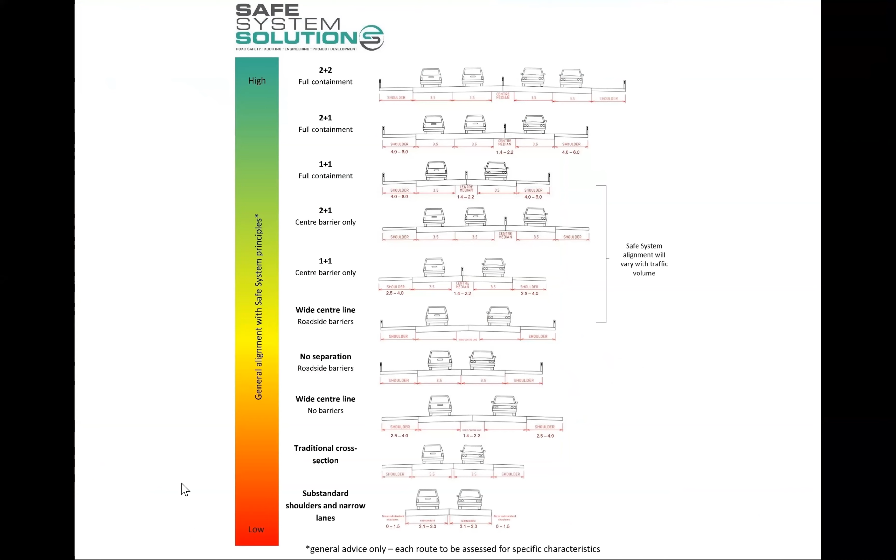But regardless of this, we know what aligns highly with safe system principles, and it's continuous barrier systems. So going from high alignment with safe systems principles down to low alignment with safe system principles, we see full containment, barrier, barrier, barrier.

Some people call it the bumper bowling of roads. They're going to leave their lane, and we're just going to corral them and slow them down safely rather than them hitting trees or taking their chances in big cleared areas where they'll roll over.

And then you sort of go down 2+1 systems, 1+1. Now, these are for your big, out there, remote or highways and the like. So pedestrian cyclists are on a different one. Motorcyclists actually get wonderful benefits from these ones as well. A few little challenges associated with types of barriers and underrun protection and things we'll talk about later.

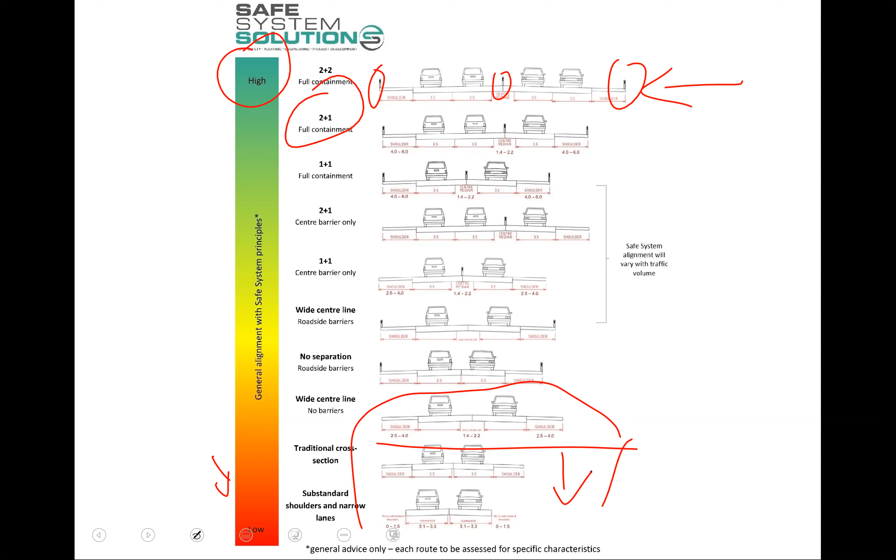Dollars, though. I know some of you are going, yeah, no, it's nice in theory, but we can't afford any of that. I mean, it's just so much road network out there, and it's true. And there's so much road network that sort of sits down in these areas, or actually probably you can even say down there. Just don't have the width and the like.

So how do we elevate those up? Or what do we do with this massive amount that is still sit down there? And I have some answers, but I think we need innovation. We need new ideas. We need vehicle technology to take over. We need better speed management.

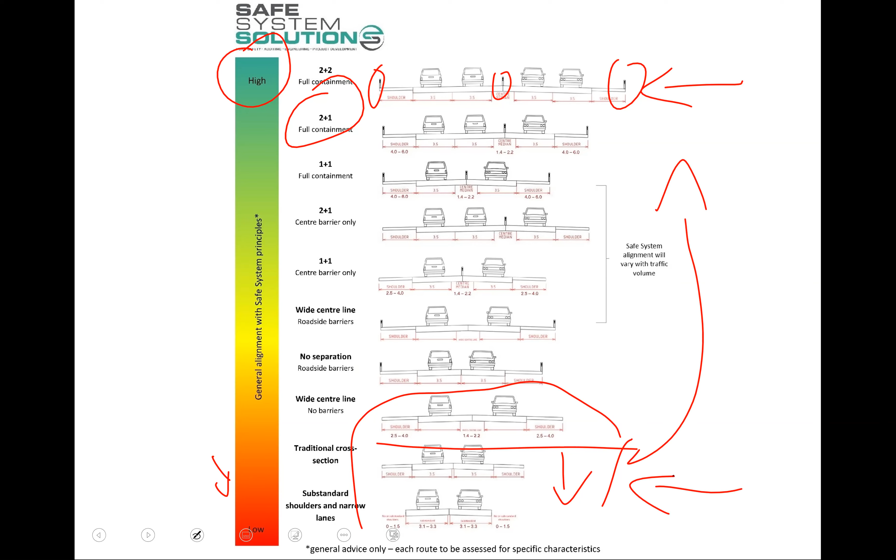We need big changes. But I put a whole lot of cross sections in your notes, and a little bit small to read here, but you can see...

They're star ratings. So this is like how they star rate your fridge and your washing machine. Well, we star rate roads as well. So that's one of the things our company does. We star rate roads under the IRAP, the International Road Assessment Program. We're accredited to give a star rating to a road or a design.

And this traditional cross section of a major highway gets 4 stars, even though we've got these big medians and these big cleared areas. Still only gets 4 stars. But we get it to 5 stars in a much narrower cross section with the barrier. Actually, if you're going to duplicate a road, it's actually cheaper to build that often due to the land take cross section.

Anyway, lots of cross sections in there, and you can have a look at what the star ratings are. This is a 1-star road, basically. These are all under the assumption they're 100 kilometers per hour speed limit.

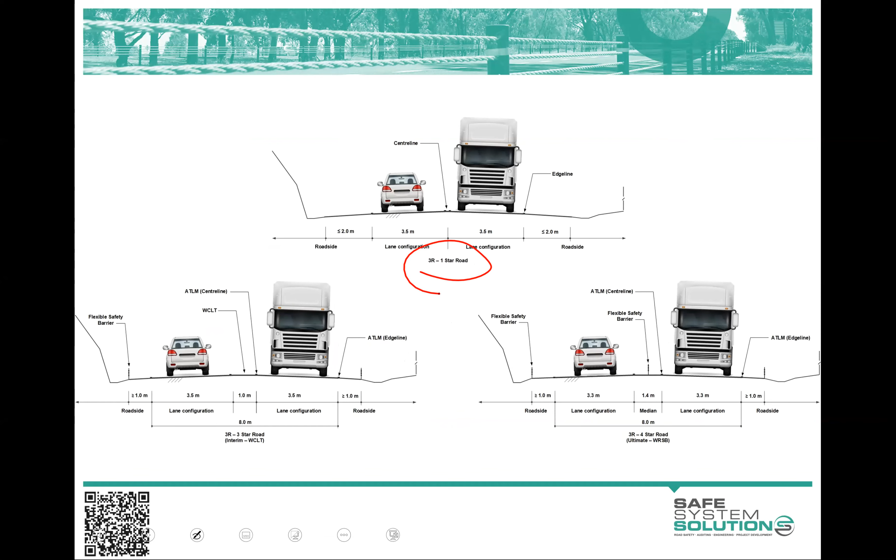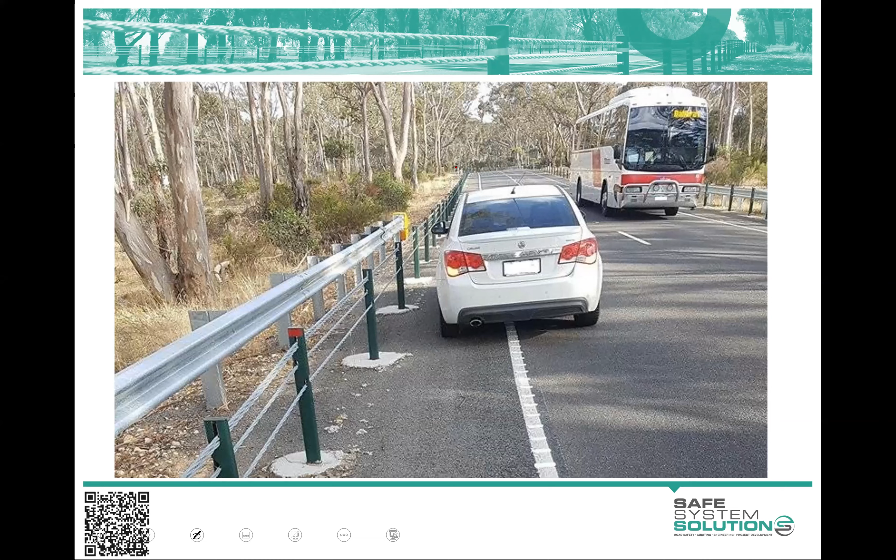Continuous barrier systems, lots and lots of intricacies on how you design it, where you place the barriers. Got to think about broken down vehicles, people, when your kid throws up in the back seat, you've got to pull over and deal with that. And there's certainly lots of learnings on continuous barrier system rollouts that we need to be better at catering for those sorts of things. I won't go into detail on that.

It's many days worth of discussion about design specifics on these sorts of jobs.

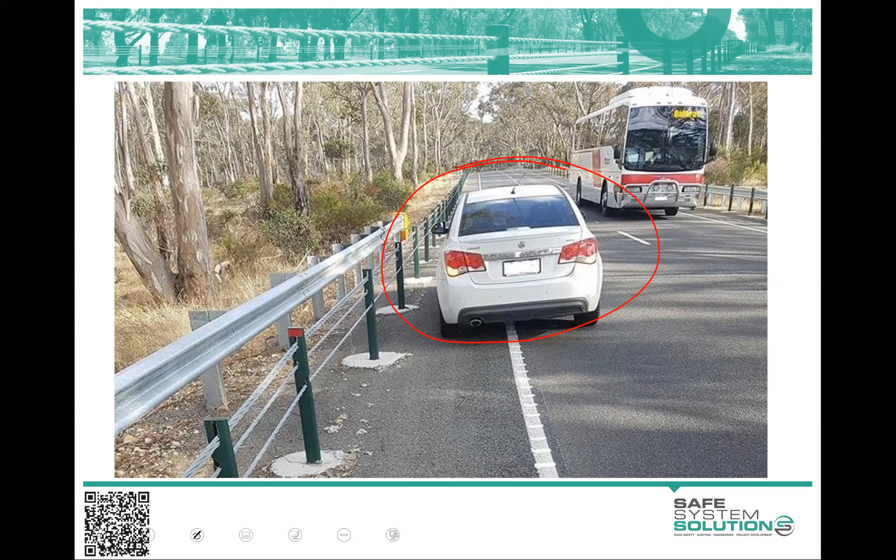The Raptor cushion sits around a power pole and compresses a bit, crumples a bit when struck, but its real genius is that when a vehicle hits it, it rotates and pushes the vehicle aside. It's like the martial arts idea of taking the energy of a punch and deflecting it - I've never done martial arts, but I watch movies. The vehicle hits it, rotates, and instead of stopping instantly, it pushes the energy along, and the vehicle slows down into the roadside.

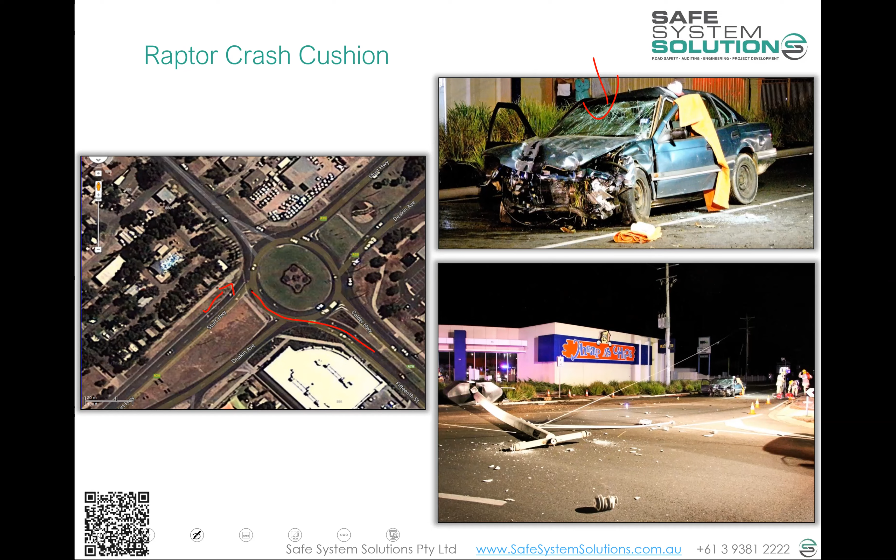So we're starting to say, well, what can we do about severity? And those sort of innovations.

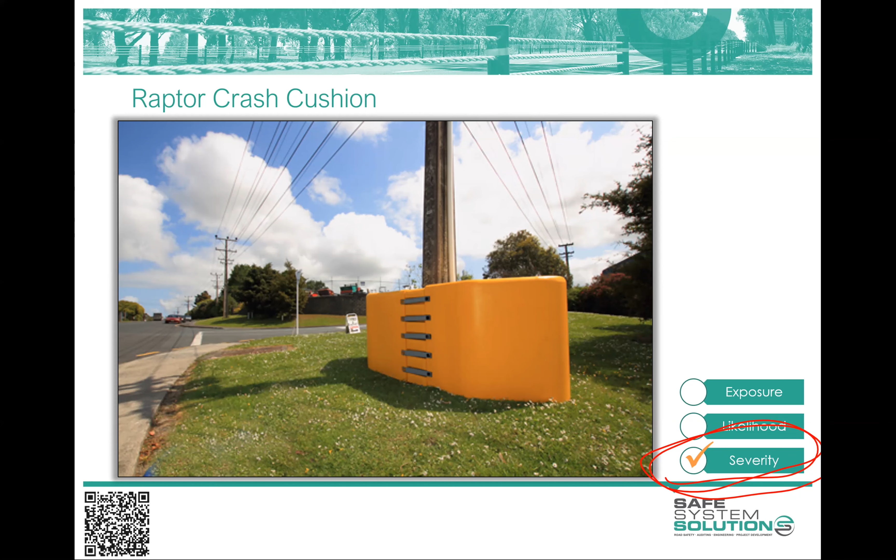Some further comments - Energex doesn't seem to be very popular, but I've been advised that Energex will not accept Raptors on their infrastructure due to issues for maintenance inspections. Not sure if their position has changed more recently. Anybody wants to get on board a class action against some of the utility providers, I will happily be providing my input into that. I've got a lot of issues similar, where the utility providers are so obsessed with preservation of their asset, they absolutely do not care.

About road safety. We had one fatality - someone ran off the road, hit the power pole, took the power pole down, killed. What was the utility provider's response? Concrete pole, because next time they hit it, it's not going to take our asset out again. I'm like, okay, we're just not thinking about it properly, anyway.

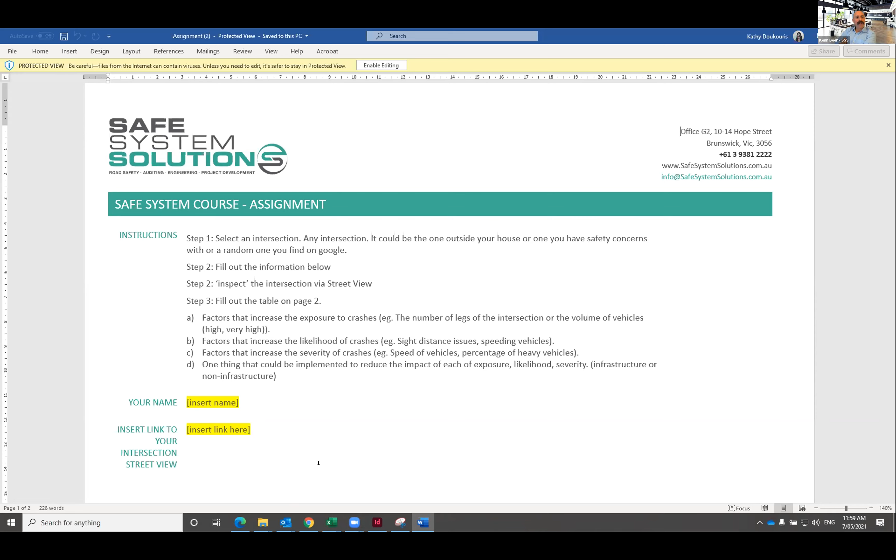Okay, so what you can do is select an intersection, and it can be any intersection. You don't need to go to it, but if it's out the front of your house, sure, you can go to it. Any intersection you want, and then you're just going to fill out anything we've highlighted in yellow below. So your name, and you're going to put a link to that intersection in there, so we can have a look at it. So Street View, or just put the address or whatever, so we can just find it and have a little look around. And then you're going to fill out the table on the next page. So if you scroll down there, Kathy.

And hopefully no surprise to you, but the columns are exposure, likelihood, and severity. So we want at least one factor that influences the exposure to crashes at that intersection. You can give us three if you want. That could be high traffic volume, or it's got lots of legs, or there's lots of people crossing - remember, exposure is all about the numbers, how do you get the numbers of people. Likelihood, then you're going to talk about factors that influence the likelihood - things like the speed of the vehicles, is it signalized or not, is the skid resistance good, line marking, sight distance impediments, all of that sort of stuff. Then we go to severity. This is where you're going to talk about how bad a crash is going to be when they happen and what's influencing that - so that'll be speed, angle of crashes, types of vehicles going through there, maybe frailty of the road users.

So once you've done that, you're then going to go through and give us one idea of things that you could change in that intersection that would make it better for the exposure, the likelihood, and the severity. A bit like you did with your little exercise there, but you're just going to have to categorize each one. So we really could do this quite quickly - you just go, one issue could be it's high volume on the major road, sight distance is blocked by a tree or a shrub, and the speed of vehicles through there is 100 kilometers an hour. And then you could go, block off a leg, clear the sight lines, and put in a roundabout, whatever - there's no constraints on any dollars or anything like that.

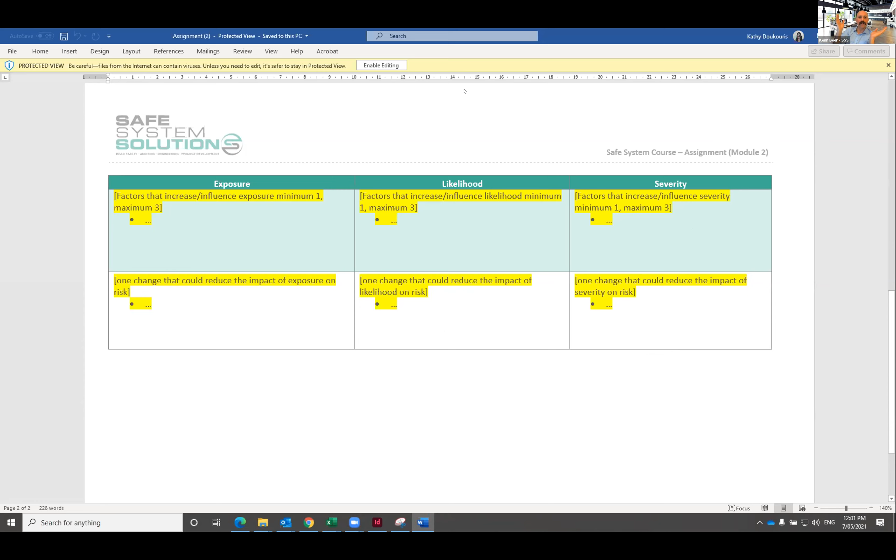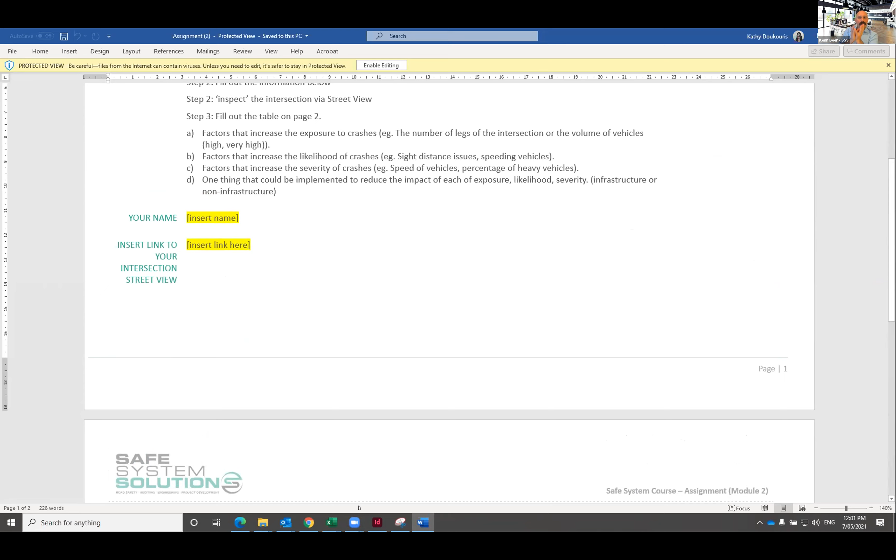But show us the intersection, have a go at it. If you have any troubles or you're confused, get in contact - we can have a one-on-one session, we can talk about it, we can look at your intersection together, we can discuss this. And then once you're finished, PDF it, or you can just leave it as a Word document if you want. Upload it straight into Moodle, and we'll get to marking it.